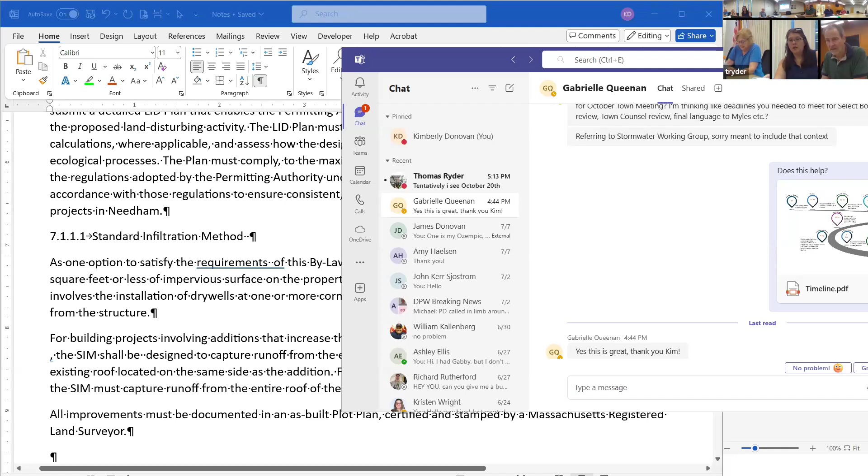It was almost an all-out brawl. Was that good? We're a very passionate bunch. Rage match. Yeah, we're a passionate bunch, that's for sure.

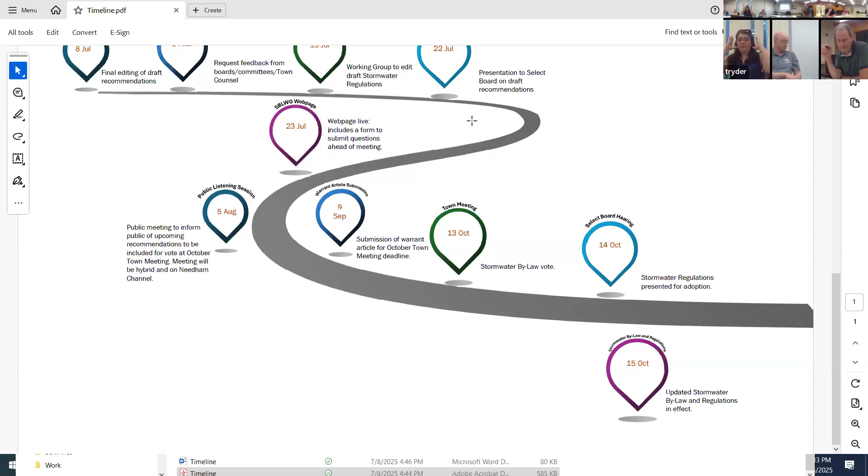Do you see a problem with putting it in our stormwater bylaw that if you put in an infiltration tank, you have to put in 2 trees? I don't understand. Want me to run it by him again? Yeah, go ahead. What I'm proposing is a simple, clear statement, because we had this meeting with the tree bylaw committee and some of the tree people and some of the large house people, and they're much further off than we are.

A lot of people want to see us deal with trees, although they're saying stay in your lane. So I thought a very clear statement that says, in the absence of any other bylaw or regulation, the applicant shall plant 2 or 3, whatever the number is, 2.5-inch caliper trees for every tank they put in. So we don't get into tree removal, we don't get into any of that - we just have that simple statement, and they can plant anywhere on the property.

You're talking about like Cultec, so your reasoning is - a Cultec or a dry well, there's whatever the options are, a system of infiltration units, you could have multiple locations. I don't have an issue with it, I think it's great.

Wow, good, nice, look at that Joe. It makes sense, bringing my mother's endorsement - my mother always used to tell me, anytime you get a good idea, take a nap. See you around.

All right, nodding off. Okay, so we're gonna come back to that when we get to that Chris section. Heath's gonna be surprised, he has to do one more review on it. I think he'll be thrilled.

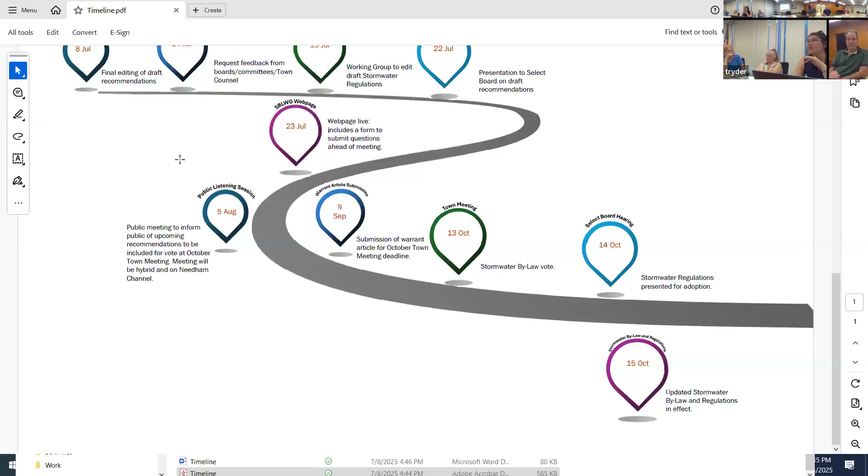I think that would kind of cover base for us. I feel it's kind of our responsibility to do something. Then once we have the tree bylaw, that takes precedence over that, so it's fine.

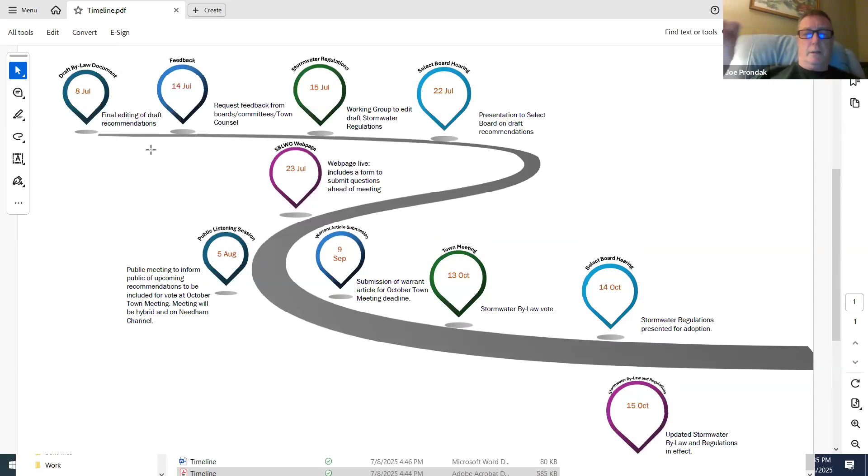Can I make one more comment before we move on? Katie King did bring up the point that she felt that - and you can correct me, Kim or Tom - Katie felt very strongly, and Lee was in agreement with her, that if the regulation is not ready for town meeting, the bylaw will have a much lesser chance of passing.

Hence the development of this little timeline or expansion of this timeline that I did before, putting it sort of where we are now. So it follows the little road here.

So the first one is today: draft bylaw document, final editing. We'll be done today.

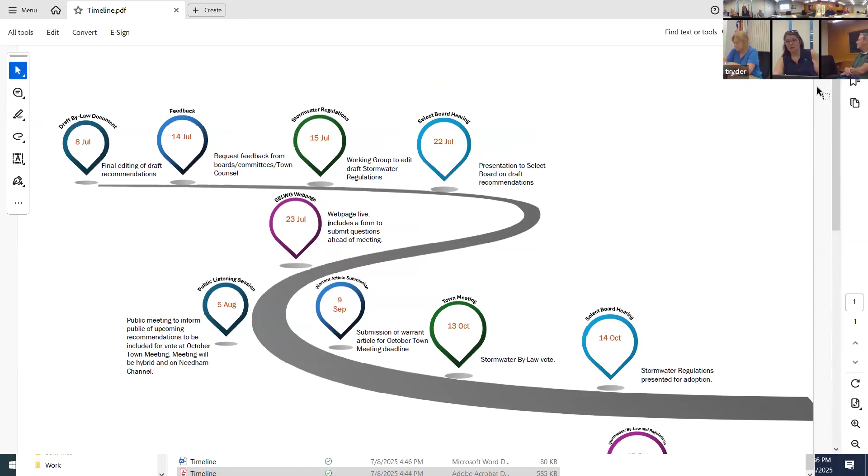All right, hold on, let me make it bigger. This is in the way. Are you having an eye test back there? So the regulations is just gonna be easy sneezy - it's not great, it's not gonna take us long. It's not gonna be easy sneezy, but we're gonna do it. We're gonna make it happen.

Positive thinking, Norman Vincent Peale, power of positive thinking, okay?

All right, so draft bylaw document, we're gonna finish it tonight. Then we're gonna make whatever Ed's finished thing, and by the 14th - I put the 14th just because that's next week, but I can do it as early as tomorrow if we're completely done - 14th of July, we send it out to the boards, committees, Town Counsel, whoever needs to review it. They get a week to do it.

I'm sorry, it's not that long, but they have till Friday. So the Conservation Commission doesn't need to review and discuss it at a meeting? I just need individual commissioners. They're not voting on it or anything like that, I just need them to review. We're basically asking them to look at it - is there anything in here that raises your hackles, that's what I'm asking.

I can send it out to the individual commissioners and they will give their feedback to me and then I will pass that on. Is that how that works? That sounds great, in between our two meetings. Just so you know, they can't discuss it.

Right, just any comments or thoughts that they have - if it's something they really like, something they really don't like, or think is glaringly inaccurate, something like that. That way you consolidate it so we don't have to deal with 15 different comments. And just so they understand too, what's coming down the pike - so if there's anything you guys need to do on your end as far as your regulations and bylaws, you are aware that it could be happening.

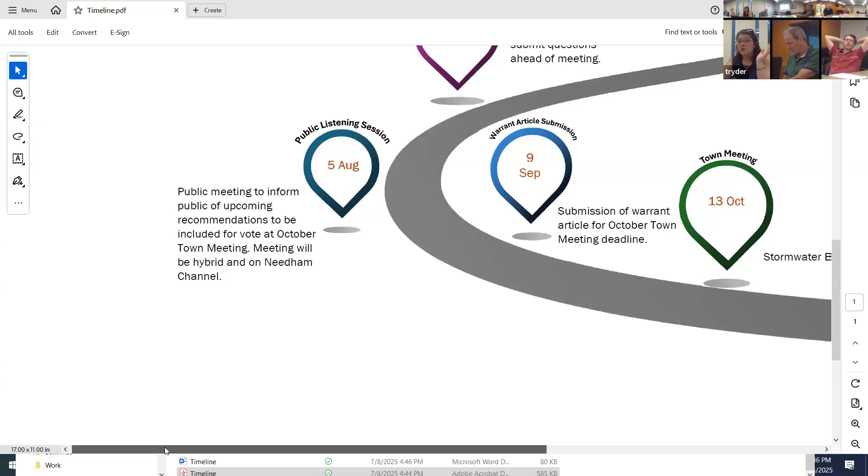And then the next select board meeting after that is... yes. We have a meeting on the 14th and we have a meeting on the 28th. So I'll change this to the 20th and the select board hearing to the 28th, because that's when we should be presenting.

Are you gonna send this out again for regulations acceptance? Yes. Okay, one other thing you should add is there's gonna be a presentation to the finance committee at some point.

So is it when we submit the warrant, or before we submit the warrant article? No, after — you have to submit it, then they will act, they'll question us. But you could just give a heads up, so somewhere between September 9th and October 20th. We have to have something in front of them to react to.

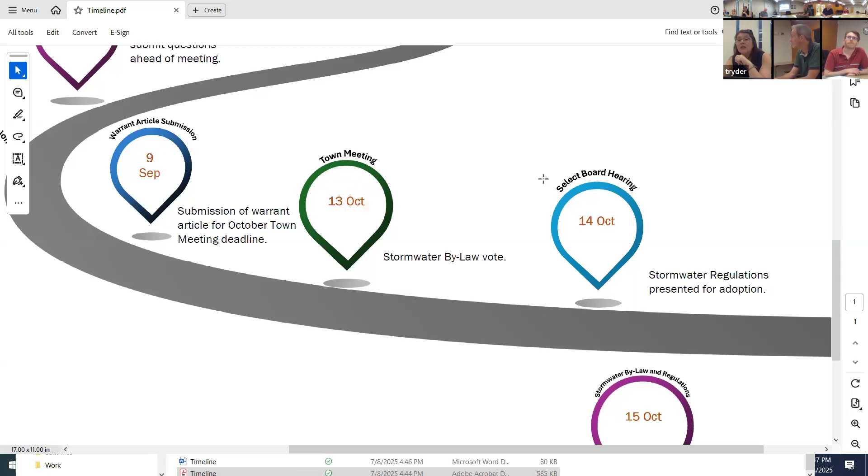Okay, I just want to make sure I'm clear as to where it happens. Okay, alright, so I will change the dates on town meeting to October 20th and select board hearing to October 28th. I'll wear my witch's hat for that. That one's for the regulations, to pass the regulations. Actually, I think it's the 29th — I think that might be a meeting that's being rescheduled. Just let me know.

If you guys could give me an email letting me know what date that is—whichever select board meeting hasn't been confirmed yet. I think whatever select board meeting follows the town meeting, that's the one we want to be at.

Josh, can you send me an email too? I have to put a bubble in for the finance committee somewhere between submission and town meeting. I don't know what that is, but I'll do that now.

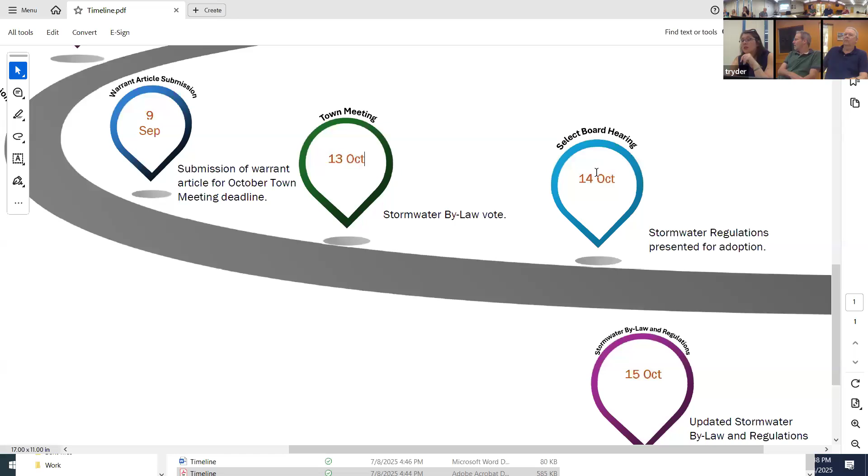Okay, and then the day after, the select board lovingly says go for it, when we hand our regulations over—updated stormwater bylaw and regulations are in full effect. So what action does the town meeting take on this? The town meeting votes yes or no on the bylaw. The select board votes yay or nay on the regulations. Right, so that's why it happens after the bylaw.

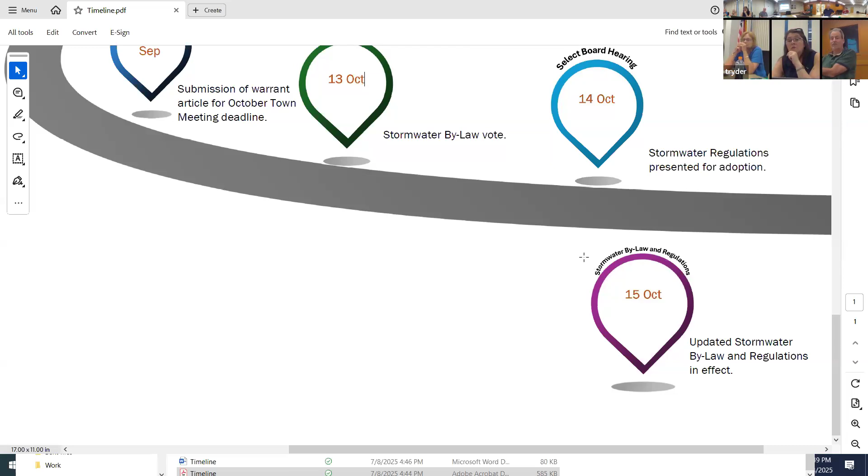Before town meeting, there might be a quick presentation to the select board as an article. On the 22nd of July we give them a thing. Somewhere between September and October, before they vote on it, they'll probably just want to touch base. Before they vote on the regulations—on the article, not the bylaw. The bylaw will be an article.

I'm assuming the July 22nd meeting you guys are going to be packed with stuff. Yeah, because it's the only meeting that month, so we'll probably do a broad brush stroke of the bylaw on the 22nd, and give more detail later. I'll give you another task on that email, Josh—if you guys could tell me where in there you'd want to put another meeting or presentation to the select board, where we fit that in. I think that depends on how controversial this is. We'll see how the July meeting goes.

Okay, August 5th, yeah, the August meeting. The September 24th meeting was switched to a Wednesday, and October 28th was also switched to Wednesday—the 20th. So if you could just let me know those dates.

Not to be negative, but I think flooding and stormwater is going to be in the forefront of people's minds. If you watch the evening news tonight—yeah, it's just unbelievable, worst ever, Texas, North Carolina, any of that. So if we're doing things to control flooding, that's gonna be well received. I think the one complaint might be, is this enough? What can we do?

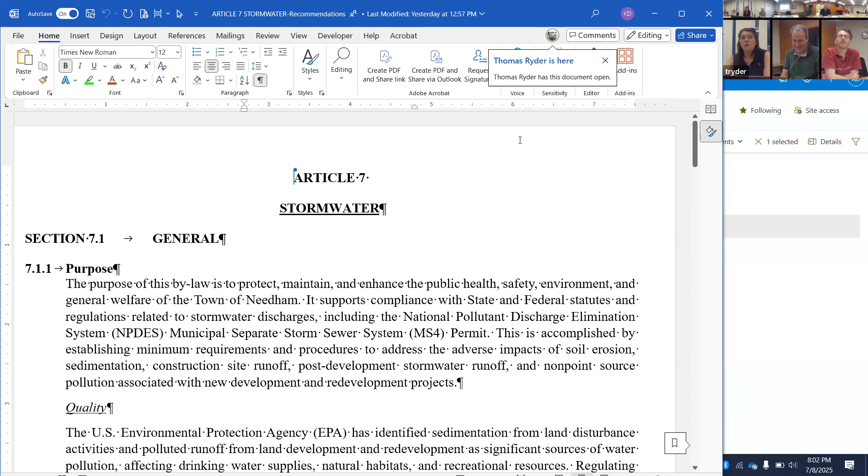Did you guys get the one I printed last week? I did not. I already handed it to you in the parking lot. Oh, thank you, Josh. Yes, can you resend it? I appreciate it. Made some further changes - just word changes, not formatting or whatever, just updated some stuff.

This is Stormwater, Article 7, Stormwater Recommendations. I thought we're done with Article 6. No, Article 7, Stormwater Recommendations, last updated yesterday at 12:57 PM.

We're gonna pick up where we left off last week so we can get through the last sections, then go back and review the definitions. What I did do is go through the document. I removed BMP, because nobody knows what a BMP is, and replaced it with SCM.

New terms, this is fast. John, guess what that is? The new term for BMP is now stormwater control measure. Oh, it's what the EPA uses, I think. Everything seems great, I like it as much, well better. Yeah, at least BMP explained it - best management practice is so ingrained in everybody's minds. Yeah, right, but unfortunately it doesn't really describe what it is, so it's hard to explain to somebody.

So I replaced it with SCM. I went through and made sure every reference to a spelled out or initialed reference had the spelled out version first, and then the initials only used following. So that's been done.

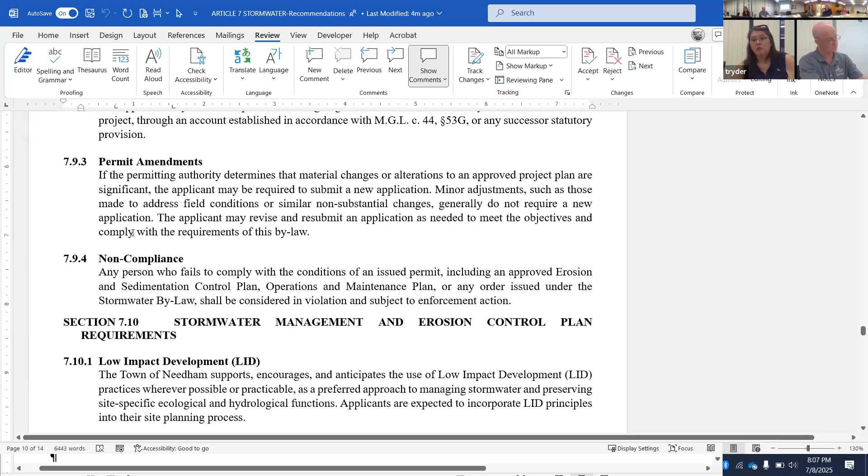That's it. We don't say anything about them having to use it, but we encourage them to use it. And that's in the definitions - well, it's an actual paragraph section. The low impact development language was a comment on our review required by NPDES for our bylaw review. It's one of the places where we fell short because we didn't specifically state that we encourage it, or that we want them to - it's please use them.

But is there a reference to what low impact development is, just as a term? Some readers might not really know. It's identified in what is considered low impact stormwater development - it's in the Massachusetts Stormwater Handbook. Low impact development is also, I think, something that should be in our regulations as to what would constitute low impact development. So this is basically the first two sentences of the longer thing we had before.

All right, so next is the regulated activities. Any construction or land disturbance activity regulated under this bylaw shall require the preparation and submission of a stormwater management and erosion control plan. The purpose of this plan is to ensure that adequate measures are in place to manage stormwater runoff, minimize erosion, and prevent sedimentation both during and after construction. The plan must demonstrate that the proposed activity will not result in adverse impacts to abutting properties, public infrastructure, or natural resources, and that it complies with the performance standards and design criteria outlined in the stormwater regulations. Obviously, we have to make those. So the permitting authority shall review all submitted plans for completeness and conformance with the requirements of the stormwater bylaw prior to approval.

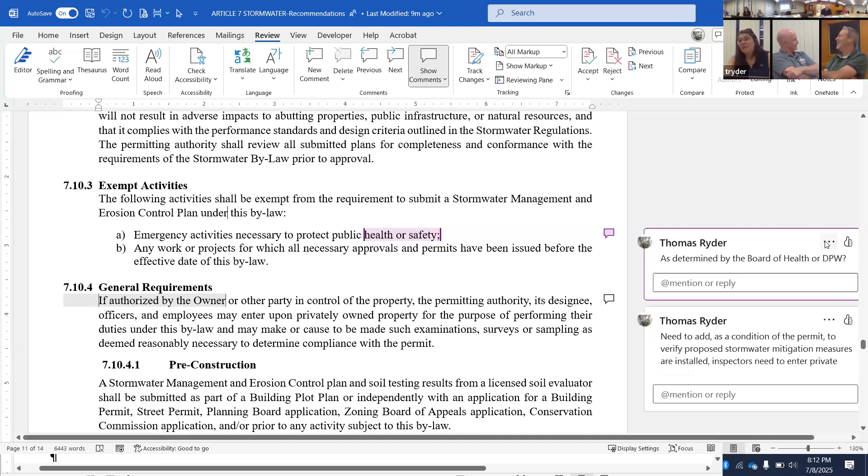So do we say, determined by the presiding authority? I don't know how you state who determines if it's protecting public health or safety. The building department could say it's about the safety of the building. As authorized by - Kristen is in charge of emergency management. So maybe, as determined by the authority having jurisdiction, commonly known as the AHJ. Oh, you guys and your initials, come on, you're killing me - I had to have one in there.

The reason I say that is because people say rain gardens are going to cause mosquitoes, and that's a health and safety issue. It is for me - I'm allergic to mosquitoes. Okay, so that one's resolved.

Next one: general requirements, and the topic here is stormwater management and erosion control plan requirements. General requirements - if authorized by the owner. Tom had put in a note about needing to add, as a condition of the permit, that inspectors need to enter private property to verify proposed stormwater mitigation measures are installed. So I'll read the whole paragraph, but I have a response to that.

If authorized by the owner or other party in control of the property, the permitting authority, its designees, officers, and employees may enter upon privately owned property for the purpose of performing their duties under this bylaw, and may make or cause to be made such examinations, surveys, or sampling as deemed reasonably necessary to determine compliance with the permit. I feel like we've already said it. So Tom, I really need you to tell me why you don't feel that's addressed, and this was one of the paragraphs Chris flagged about us having the right to enter property.

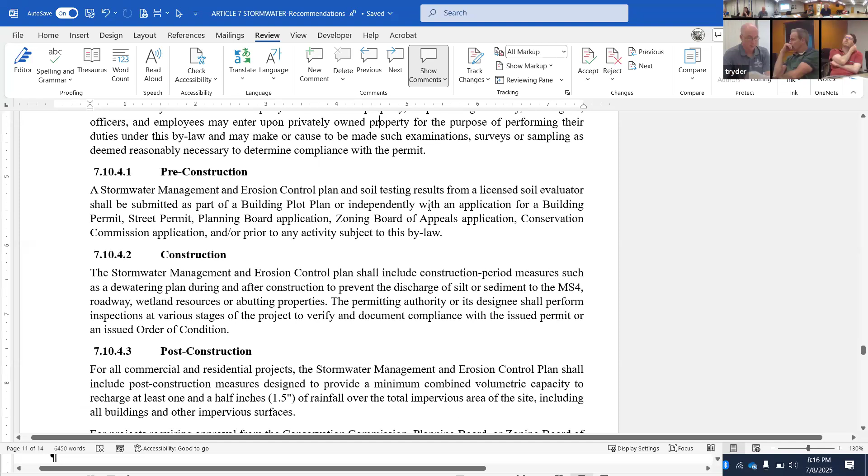There are licensed soil evaluators. Just for ease of reading, there are a lot of 'ands' in there. Stormwater management and erosion control is one thing, and then soil testing results are a separate thing. Between the two, rather than 'and,' can we just say 'along with'? Would that help with readability?

Stormwater management and erosion control plan, along with soil testing results from a licensed soil evaluator, shall be submitted. Does that help it? Sounds good. Comma, along with. So that's results.

Just a question, Tom. When we say a licensed soil evaluator, is that someone licensed by the Commonwealth, or an actual engineer? Yeah, that's licensed by the Commonwealth. Should that be in the definitions? Should we say a Massachusetts licensed soil evaluator? Is that a license issued in Massachusetts, or is it a civil engineer? It's a license, yeah.

But wouldn't we also accept something from like a geotech engineer, or even a civil engineer? I'm contemplating that. So, do you want to say 'qualified' instead of 'licensed'? Registered? Qualified might be better, because that encompasses the whole gamut. But I would put in a definition for 'qualified' then to say a licensed soil evaluator is qualified, a soil scientist may be qualified, an engineer would be qualified.

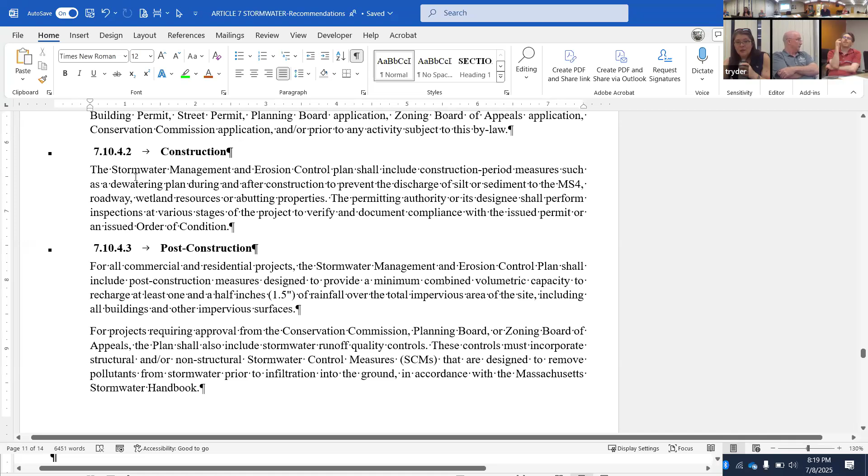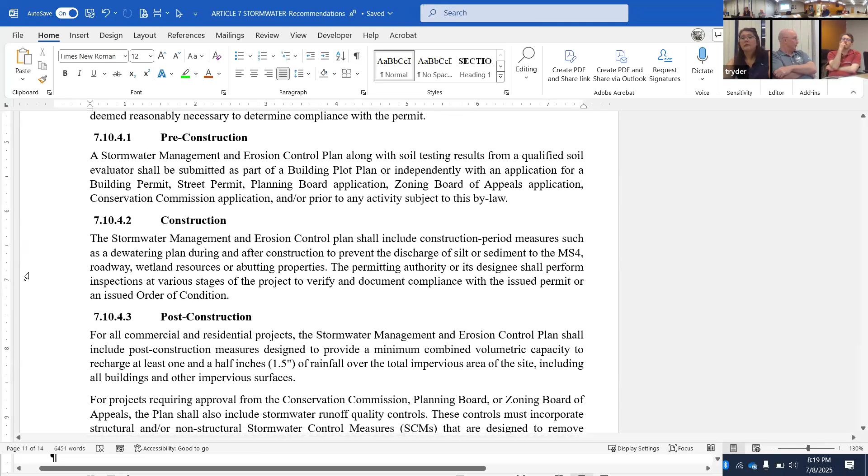This is why I need paragraph markers, I can't see it without them. The reason I have it as soil evaluators is because there's formatting of groundwater elevations and materials that are specific to the licensed individual who has to sign off on it, whereas a geotech will use a different format, may use a USDA standard, may use AASHTO, may use something else.

I'm gonna ask you guys to do this. Somebody's gonna volunteer to read out construction and post-construction and see if there's any comments or ideas or thoughts on the language, if we need to change it or if we're accepting of it. Are you losing your voice? Nope, I need to excuse myself. Read silently or read out loud? Why am I the only one who reads out loud?

Stormwater management and erosion control plan shall include construction period measures, such as a dewatering plan during and after construction to prevent the discharge of silt or sediments to the MS4, roadway, wetland resource, or abutting properties. The permitting authority or its designee shall perform inspections at various stages of the project to verify and document compliance with the issued permit or an issued order of conditions.

Is Deb there? The order of conditions is a permit. So do we need that, or any issued orders of condition?

Is Debbie there? She's there. Because it was a legal comment on that. Are you on mute?

Are you saying we could just stop at issued permit, Sue? Yes, because an order of condition is the permit. Right, Deb? Sorry, please repeat. On the last sentence, can we delete 'or any issued orders of condition' and stop at 'issued permit'? Because the order of condition is a permit. Correct? The order of conditions is a permit. Okay.

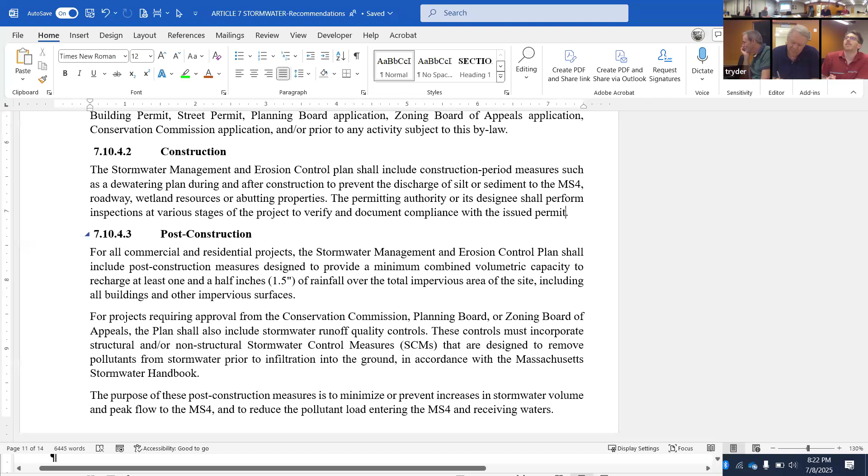For projects requiring approval from the Conservation Commission, Planning Board, or Zoning Board of Appeals, the plan shall also include stormwater runoff quality controls. These controls must incorporate structural and/or non-structural stormwater control measures that are designed to remove pollutants from stormwater prior to infiltration into the ground, in accordance with the Massachusetts Stormwater Handbook. The purpose of these post-construction measures is to minimize or prevent increases in stormwater volume and peak flow to the MS4 and to reduce the pollutant load entering the MS4 and receiving waters.

Well done. Next week on we're reading construction Shakespeare.

7.10.4.2, we took out orders of conditions. Yeah, we just clipped the end of the last sentence. And the issued permit, or order of condition, is a permit. Okay, and changes were made. Okay, post-construction, so thoughts? Do we love it?

You note on the definitions, remove order of conditions, because I know that is a definition. Okay, why didn't we have street permit on, for projects requiring approval from conservation, planning, zoning? Why don't we have DPW on that? Did we miss that, or did we remove it intentionally? Possibly. Right, no, we just assumed.

I have a building comment on that. You know, oftentimes people go to the zoning board for just approval for a certain use in a building. You know, so there's no construction going on. There's no increase in impervious surface. There's no repaving. There's nothing. So that shouldn't trigger automatic stormwater review.

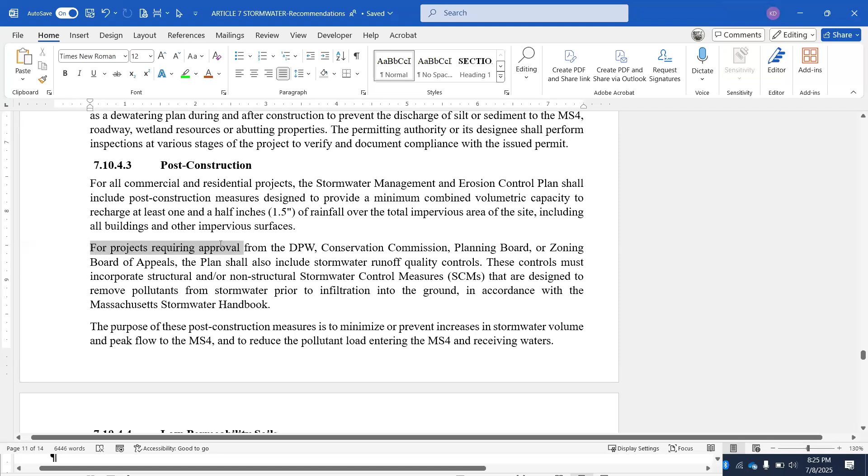Projects subject to this bylaw requiring approval from Conservation Commission, Planning, Zoning Board of Appeals. Okay, for projects subject to this bylaw and requiring approval on. Subject to this bylaw requiring approval. Okay.

I like it. Should 'plan' be capitalized here? I'm thinking no. Should what? Yes, no.

All right, low permeability soils. This is the part, I took out the part that says about determinations and stuff, because we decided that needs to go into the regulations. So this is just stating that in cases where low permeability soils are present, the DPW director may, in consultation with the engineering division, authorize modifications that are consistent with the intent of this bylaw. The applicant must conduct and submit soil testing results that describe soil types and groundwater elevations. And then we were gonna go into specifics in the regulation as to what types of alternatives might be available.

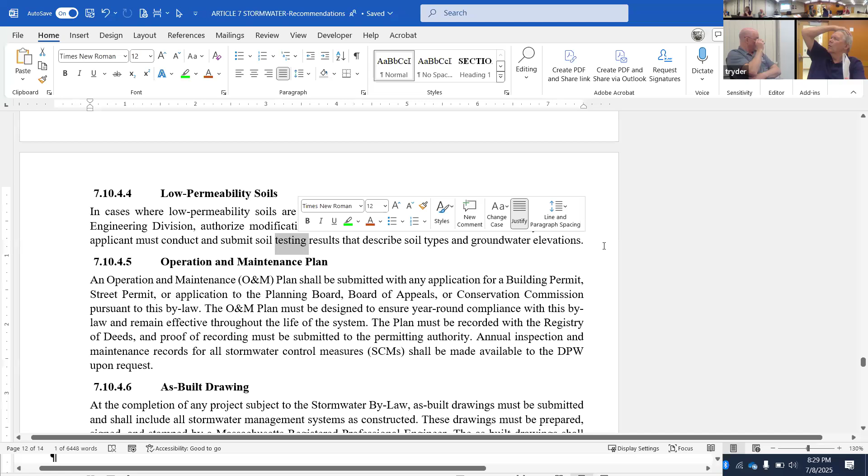So I think from what I'm hearing is basically a soil evaluator or someone who can be proved to be competent, because a soil scientist could be competent, or a geologist, someone, a soil engineer, yeah, anybody.

I just don't see the need for a perc test every time. No perc tests, that's what it sounds like to me. No, just a deep hole test to determine where the water is, the perc tests are useless.

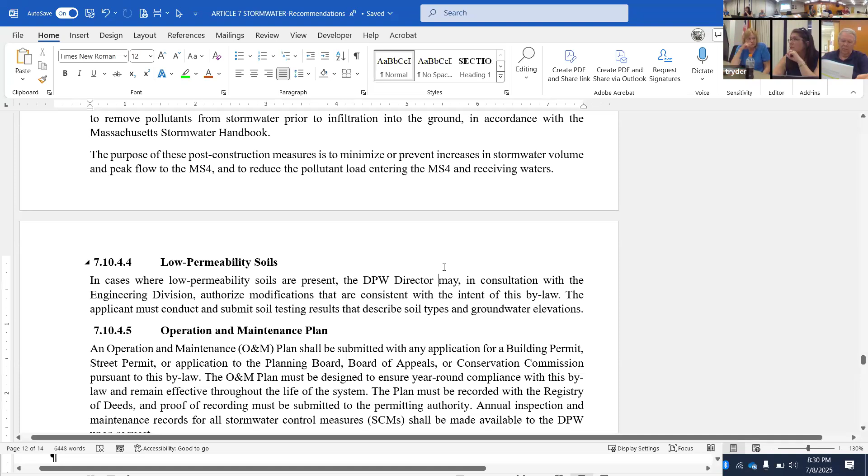So we should have in the regulations what is soil testing. Okay, no definitions in the regulations, correct? I don't know if we need to. I just think low permeability soils, if that should be a definition somewhere, but the regulations might cover it. I guess I would maybe make one suggestion, to add 'in consultation with the engineering division and permitting authority.'

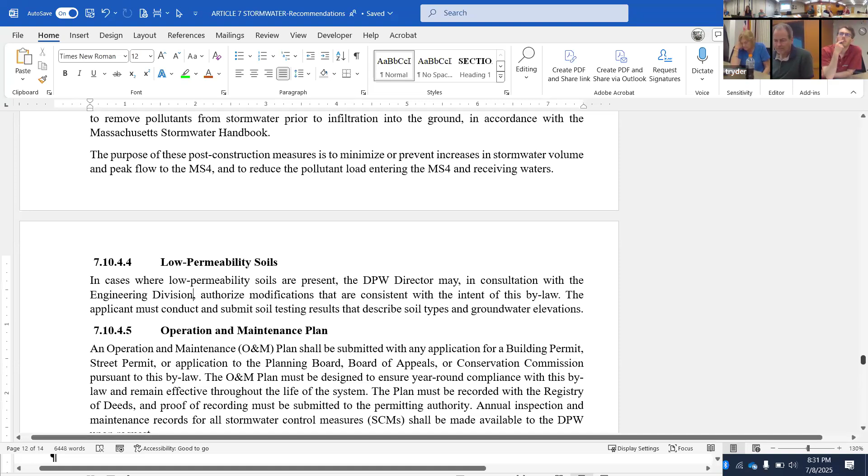Question: so the standard infiltration method paragraph, is that going into the regulations? Because it's a methodology, not... well, yeah, we're reviewing for the regulations. Yeah, it doesn't even get referenced anywhere in the bylaws, so take that out of the bylaw. That's what you're thinking too, right? Yeah, makes sense.

Okay, alright, operation and maintenance plans. An operation and maintenance, or O&M plan, shall be submitted with any application for a building permit, street permit, or application to the planning board, board of appeals, or conservation commission pursuant to this bylaw. The O&M plan must be designed to ensure year-round compliance with this bylaw and remain effective throughout the life of the system. The plan must be recorded with the registry of deeds, and proof of recording must be submitted to the permitting authority. Annual inspection and maintenance records for all stormwater control measures shall be made available to the DPW upon request.

And that was something we edited last time too, because we wanted to leave it open for when we do have the capacity to receive the O&M. Did we have it to the DPW or permitting authority?

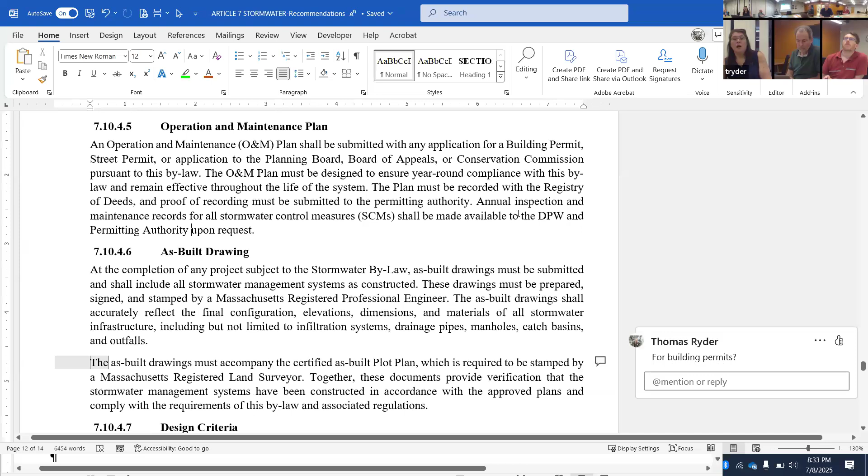As-built drawing: at the completion of any project subject to the stormwater bylaw, as-built drawings must be submitted and shall include all stormwater management systems as constructed. These drawings must be prepared, signed, and stamped by a Massachusetts registered professional engineer. The as-built drawing shall accurately reflect the final configuration, elevations, dimensions, and materials of all stormwater infrastructure, including but not limited to infiltration systems, drainage pipes, manholes, catch basins, and outfalls.

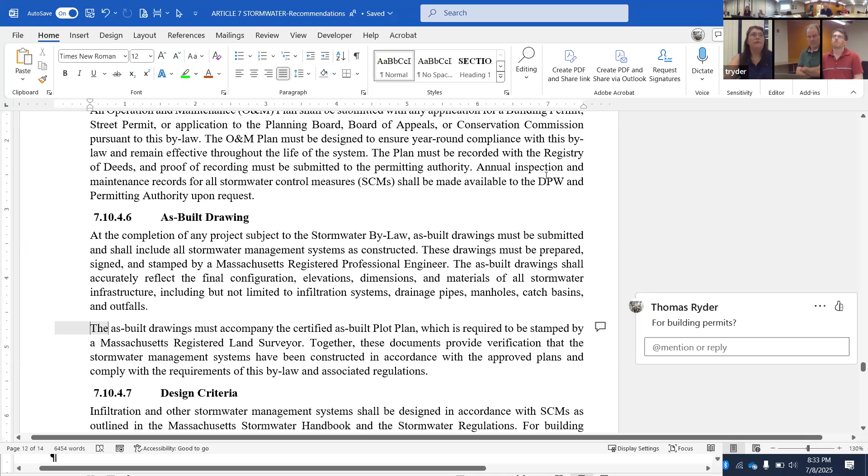I like that. Sounds pretty straightforward to me.

The as-built drawings must accompany the certified as-built plot plan, which is required to be stamped by a Massachusetts registered land surveyor. Together, these documents provide verification that the stormwater management systems have been constructed in accordance with the approved plans and comply with the requirements of this bylaw and associated regulation.

Tom had a comment on this, asking about building permits. When I was dealing with civil engineering stamps, typically it doesn't require submission to the building department - it's usually a surveyor, for the plot plans specifically.

So I'm suggesting that we have a civil engineer certify that it was installed in accordance with the plans. But usually a surveyor prepares the as-builts. It can be a civil engineer too, but under the building department, they don't. Joe, do you accept civil engineer stamps? It's gotta be - for offsets, you need a surveyor.

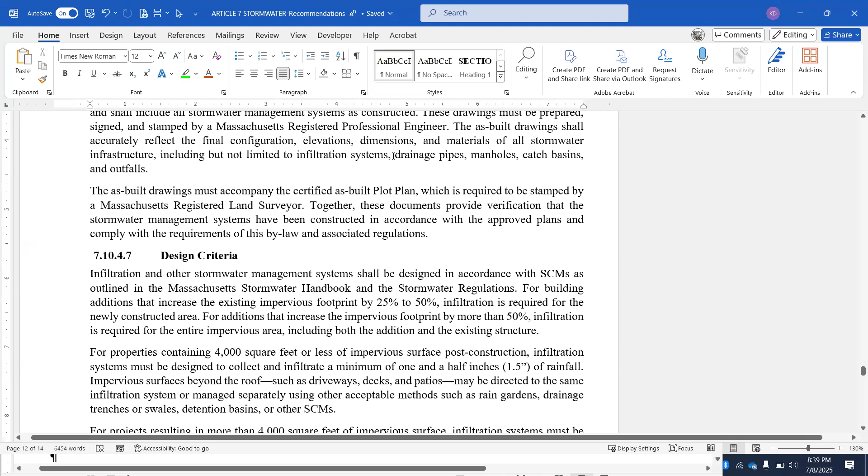That as-built is correct, that's how it was constructed. What was designed does get built. A surveyor is just certifying what's on the property, certifying the location of stuff, whether it be the house, the tanks, the pipes. And then the engineer would certify the design is correct. That sound right, Tom? Yeah, because this is the end of the line, so you'd better have the engineer sign it off.

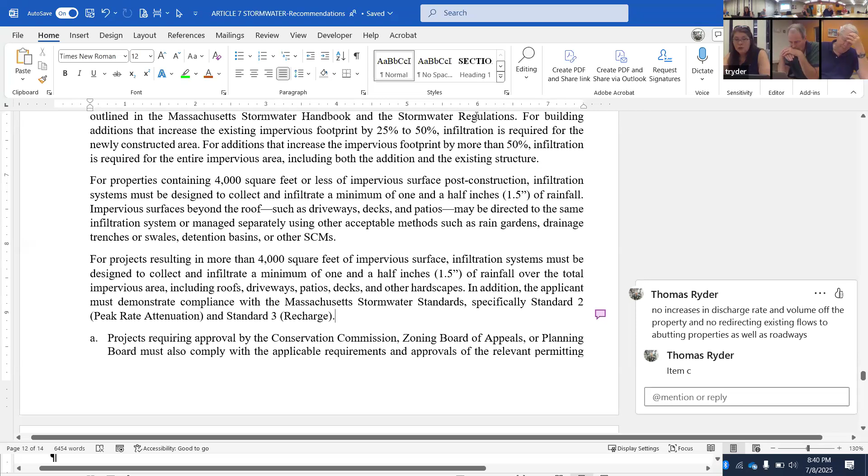For projects resulting in more than 4,000 square feet of impervious surface, infiltration systems must be designed to collect and infiltrate a minimum of 1.5 inches of rainfall over the total impervious area, including roofs, driveways, patios, decks, and other hardscapes. In addition, the applicant must demonstrate compliance with the Massachusetts stormwater standards, specifically Standard 2, peak rate attenuation, and Standard 3, recharge. Projects requiring approval by the Conservation Commission, zoning board of appeals, or planning board must also comply with the applicable requirements and approvals of the relevant permitting authority.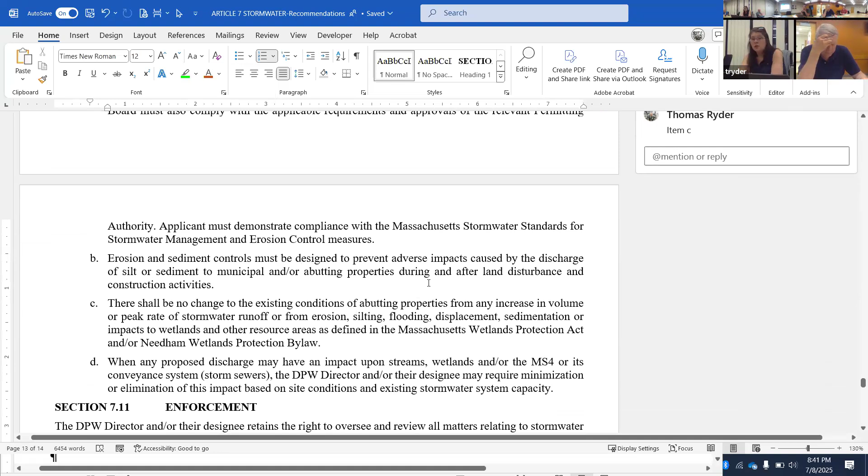Applicant must demonstrate compliance with the Massachusetts stormwater standards for stormwater management and erosion control measures. B: erosion and sediment controls must be designed to prevent adverse impacts caused by the discharge of silt or sediment to municipal and/or abutting properties during and after land disturbance and construction activities. C: there shall be no change to the existing conditions of abutting properties from any increase in volume or peak rate of stormwater runoff, or from erosion, silting, flooding, displacement, sedimentation, or impacts to wetlands and other resource areas.

As defined in the Massachusetts Wetlands Protection Act and/or Needham Wetlands Protection Bylaw. D: when any proposed discharge may have an impact upon streams, wetlands, and/or the MS4 or its conveyance system, storm sewers, the DPW director and/or their designee may require minimization or elimination of this impact based on site conditions and existing stormwater system capacity.

This is the category that we talked in detail with Chris on, and C was the one that we added because we wanted to make sure the abutters weren't being affected, which is what you noted here, so I think that's been addressed.

So what this means to me, if you scroll up a little bit, for projects resulting in 4,000... okay, right under that we have A, B, C, D. Is this the assumption that most of the conservation, zoning, planning will be seeing more than 4,000 square feet and therefore... I'm just trying to find out what this A, B, C, D is, you know.

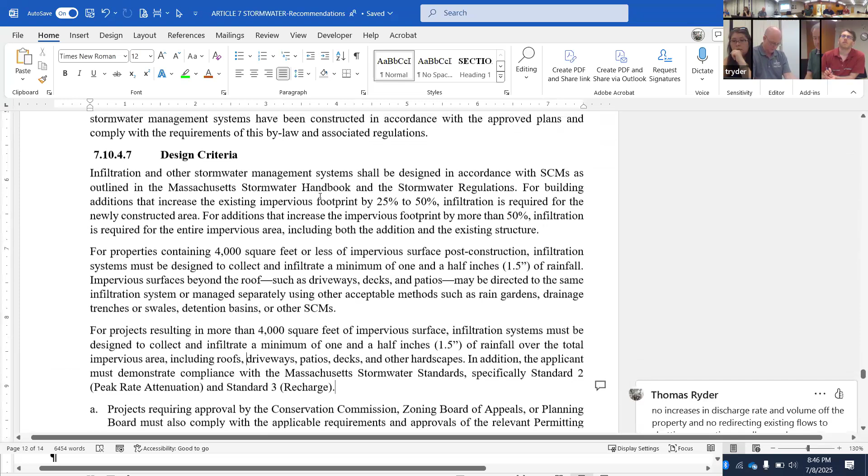Impervious is more, that's right. Yes, it is. And I changed it from impervious surface to impervious surface slash cover, because we used the two sort of interchangeably.

I have 3 comments. On the part where it talks about no runoff to the abutters, should we also say public land? We say no change to existing conditions of abutting properties, so whether it's public or private land we just say properties. Well, so do we mean streets? Yeah, like you can't dump it on the street and then flood down the hill.

I think we were playing with this over the last couple of weeks, so if we just clarify that, because I think that's what it was supposed to mean - abutters or public ways.

Okay, and then should we do the same thing we did in a previous section where we say projects subject to this bylaw needing approval from DPW, Conservation Commission, yada yada yada. And let's back up a little bit.

Yeah, oh yeah, is that in A? Yeah, in a project... project subject to this bylaw, right? Where was that, John? Where did we put that?

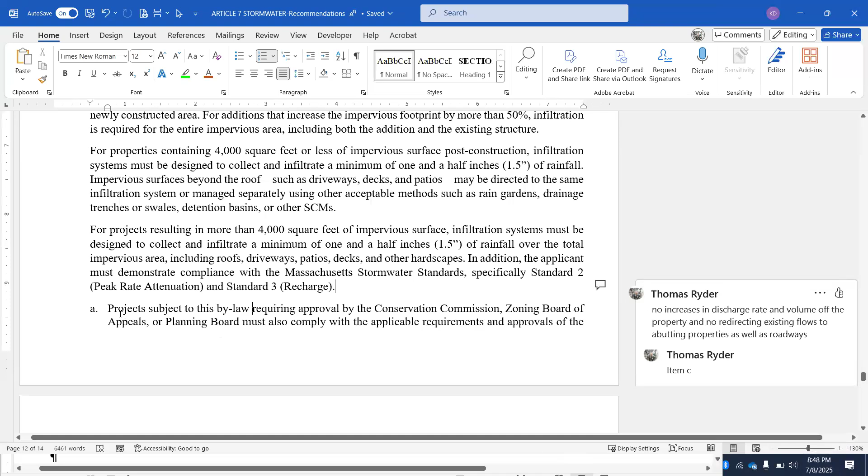And then my final comment is, if everybody liked my proposal at the beginning of the meeting, is this the place to put it in? And I've put it into an email that I can now send to Kim, and she could post that if we think this might be... Yes, all right, I agree. Good timing, right.

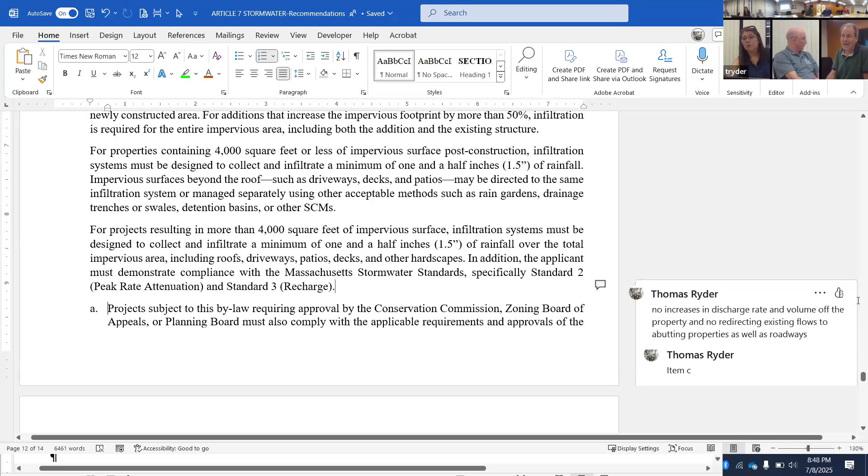So are we all agreed that I'm taking it out of A, B, C, and D, they're their own now? I just wondered why - is there a reason why we had A, B, C, D, E? Because I think that's how it was in the original bylaw. It's convenient for referring to, yeah, it's really helpful.

And then what was the project subject to this bylaw? Hold on. Change the format. Native trees.

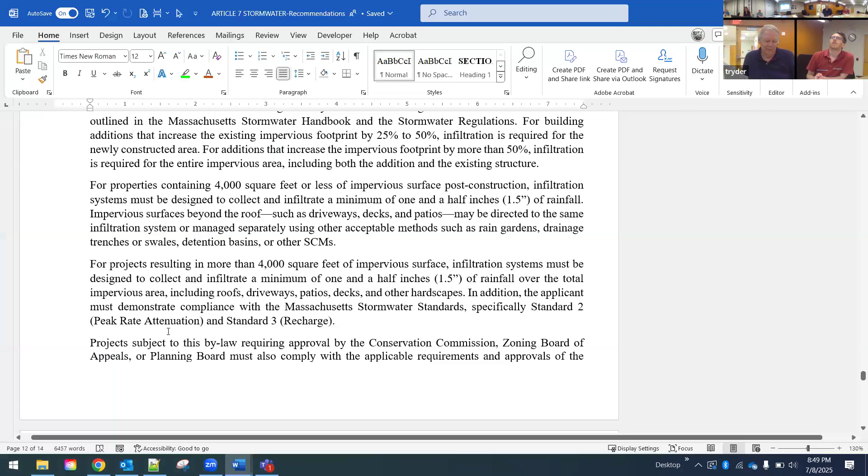Where do you want to put it? Back on at the end of it. So I have some summer seasonal help right now going through the last several years of our permits.

And trying to get an overview of how it's been working. I think one of the things they're finding out is that some of the surveyors have been pretty creative on impervious area. So there could be a trigger for like, is there really more than 4,000 square feet of impervious area already for many of the sites?

The definition really matters. Yeah, and also I guess the design really matters, because the surveyor is not designing, they're just saying oh, you know, here you go, so it's interesting - certificate, right?

I think that Joe should go after, before what was previously the ABC, so right after the other paragraph. Yeah, I don't disagree, that's where I initially was gonna put it.

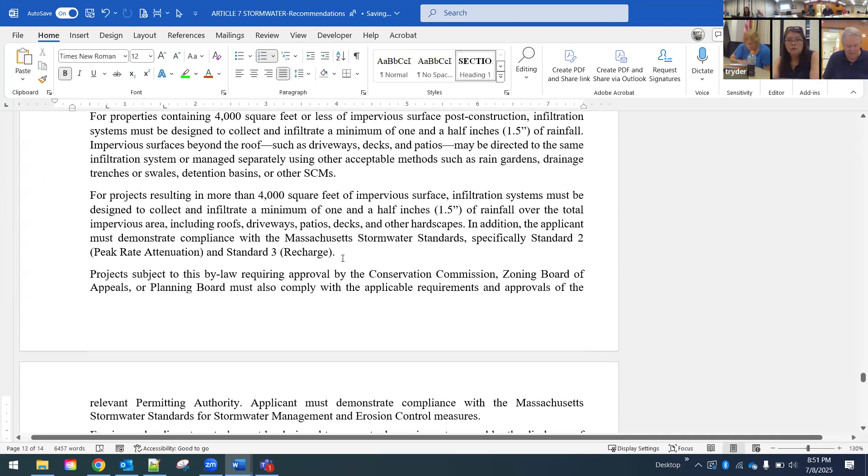For each required holding tank, Cultec, designed dry well, or rain garden shown in the proposed plan, we're gonna add a tree. For a rain garden too? Yeah. I would exempt the rain gardens, because you're already trying to populate more vegetation anyways.

Well, Cultec's a brand name, so. Do you want to just define holding tank? Yeah, call it dry well system. Maybe. You wouldn't say infiltration system? Or designed dry well system.

Yeah, we're not doing tanks, we're doing— right. Joe, you want it simple. When he's saying in-ground tanks, he's talking about infiltration chambers. Chambers, okay. So, infiltration systems as defined by the regulations.

Maybe we're splitting hairs here—chambers, we're talking holding cisterns, chambers. Chamber system, yeah. For each required infiltration chamber system or designed dry well shown in the proposed plan. So this is just a counting issue—does one project have a single system, or sometimes four, typically one or two. Is each tank a system, is that what you're saying?

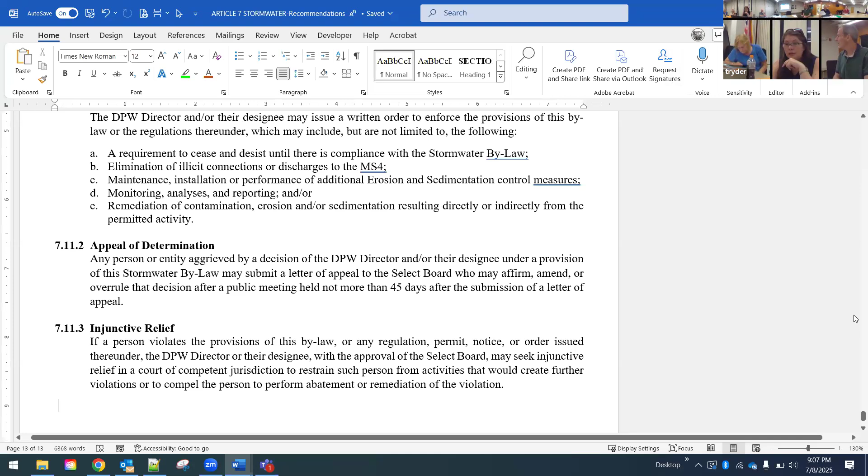Definitions. Sorry, I just moved my thing again. Well, it's been a long time since we looked at those.

Before I go back to definitions, in the first section here, under quality, we said consider the preservation of trees and tree canopy. Can we get rid of that statement since we added the tree section in the requirement? Well, that's part of the objectives, right? So keep it, then we can point to our clause - that justifies what we said in that last section.

Instead of 'consider preservation,' how about 'preserve' the tree? Or 'support the preservation'? Promote the preservation.

Actually, it's not just canopy - it's also because we want erosion control, right? So it's not just because we like greenery, it's because... A tree doesn't really suck up a whole lot, I mean it will if you remove all kinds of stuff, but it's not like if you plant a tree you're now getting rid of...

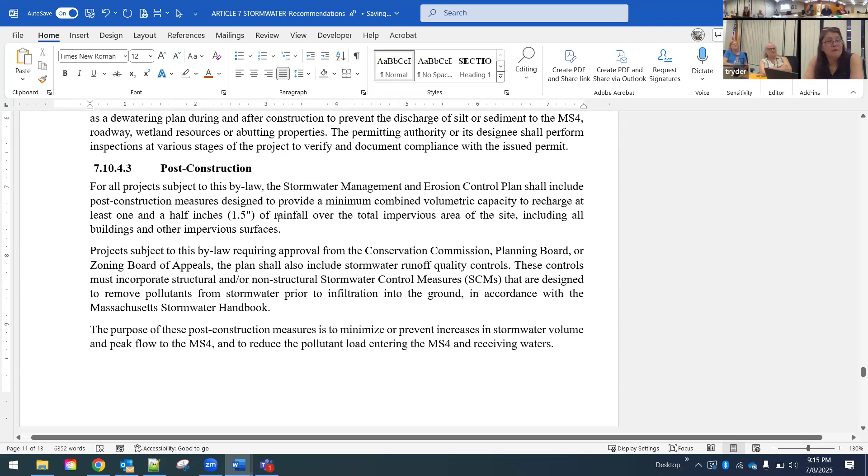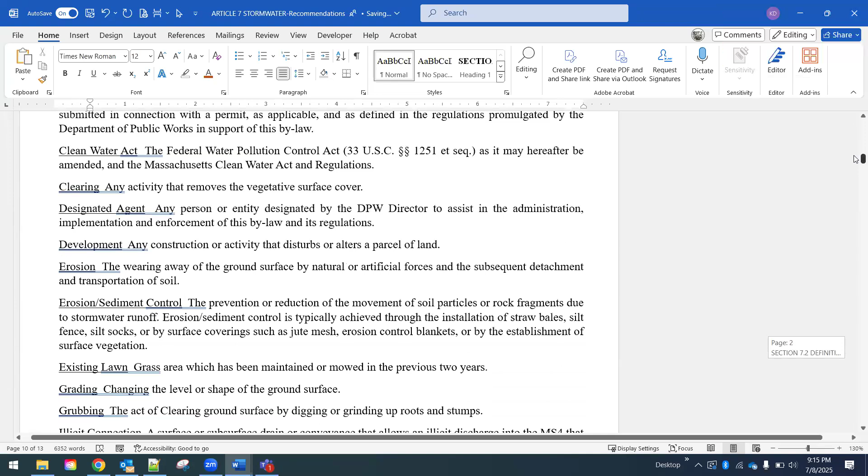I wanna know how Joe ever figured out 750 cubic feet. Oh, how many minivans? 42, yeah, minivans. Joe, how'd you figure that out? I'd say it's because you don't have a life. Just kidding. What did I figure out? How many minivans? Sometimes it's hard to hear here when you're on. Minivans, how many minivans were 42, 750 cubic feet? I wanted something relatable, so I kind of did a measurement thing on a minivan. That's genius, very good. Not a CR-V or Sienna? Yeah, I know, yeah, thinking about how many cubic yards one minivan takes up.

Okay, so we got rid of commercial. Clearing: any activity that removes the vegetative surface cover.

Designated agent: any person or entity designated by the DPW director to assist in the administration, implementation, and enforcement of this bylaw and its regulations. It could be any of those, not all of those. Yeah, right, correct.

Development means any construction or activity that disturbs or alters a parcel of land. Sure.

Erosion means the wearing away of ground surface by natural or artificial forces and the subsequent detachment and transportation of soil. Thank you, Google.

Erosion or sediment control: the prevention or reduction of the movement of soil particles or rock fragments due to stormwater runoff. Erosion or sediment control is typically achieved through the installation of straw bales, silt fence, silt socks, or by surface coverings such as jute mesh erosion control blankets, or by the establishment of surface vegetation. I could take off the second sentence if we just want to leave it as soil particles due to stormwater runoff, but I think it's helpful.

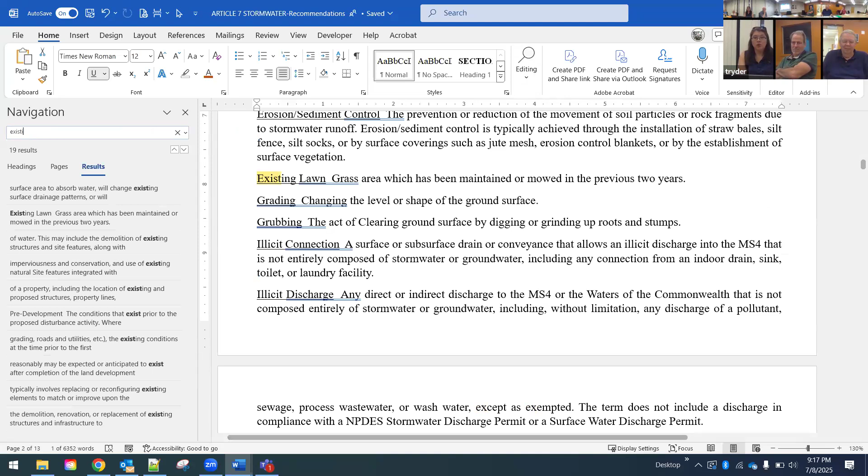Existing lawn, this was one of those things that was questionable, but we had it defined in our original: existing lawn, grass area which has been maintained or mowed in the previous 2 years. Why do we need that? I have no idea. Is there something, do people do projects in phases? I think it's because when we did the removal, if I'm not mistaken, when you regrade your property or whatever to do your lawn. Well also, if a property is for sale for a long time and no one's mowing it, then the native vegetation will pop up and then people will argue it's not the maintained lawn.

Oh, so it's under the no-approval-required section for these things, one of them being restoration of existing lawn areas without lot grading. Okay, I'm good. I'll put my teeth back in my head in a minute. I lose my words all the time.

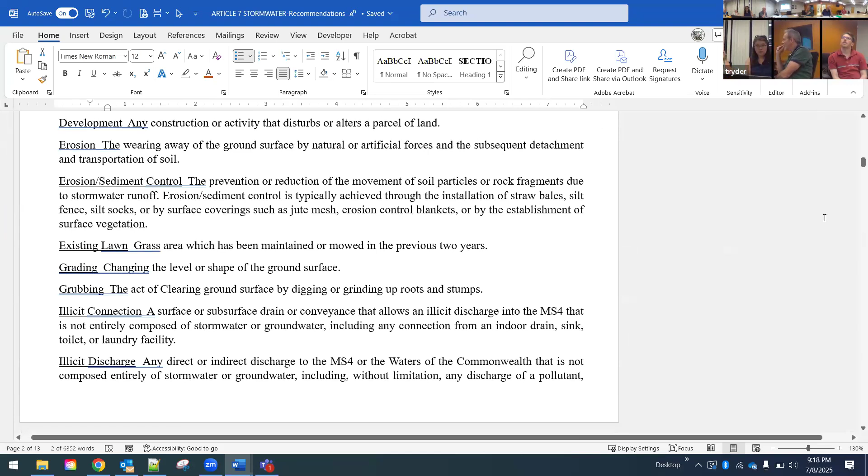Okay, grading means changing the level or shape of the ground surface. Grubbing is the act of clearing. We're going to insert something here, after grubbing, so holding tank. I'm just going alphabetical on my list.

Holding tank? Where does that show up? We just added that. Didn't we change it to something else? Yeah, we changed holding to infiltration system.

Nice try. Ah, no, just kidding. Okay.

Illicit connection: a surface or subsurface drain or conveyance that allows an illicit discharge into the MS4 that is not entirely composed of stormwater or groundwater, including any connection from an indoor drain, sink, toilet, or laundry facility. Including, but not limited to, any connection, because it could be something else.

So a sump pump doesn't count because... well, here's the thing. Originally we had in there 'not entirely composed of stormwater or clean groundwater.' However, legal question: what is clean groundwater?

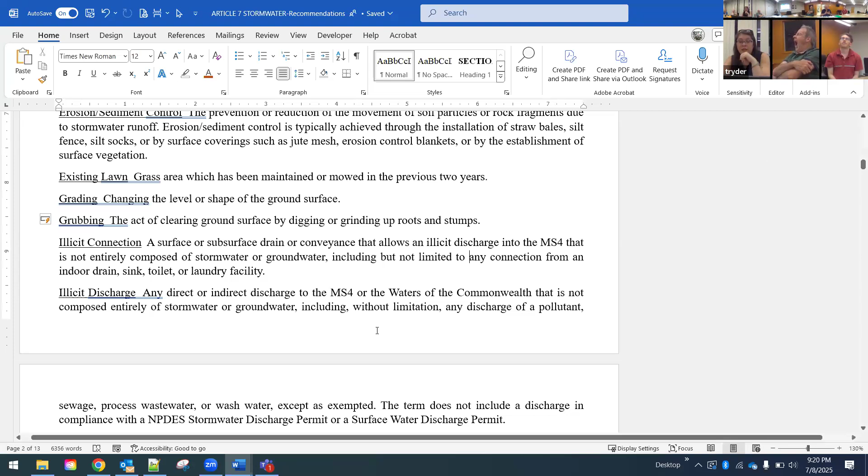So I took out 'clean.' If they flag it again, maybe we'll deal with it. I don't know, is there any reason why 'clearing' has to be capitalized? It doesn't, so I changed it.

Illicit discharge: any direct or indirect discharge to the MS4 or the waters of the Commonwealth that is not composed entirely of stormwater or groundwater, including without limitation any discharge of a pollutant, sewage, process wastewater, or wash water, except as exempted. The term does not include a discharge in compliance with an NPDES stormwater discharge permit or a surface water discharge permit. In other words, if they have a reason to do it and they've been approved, right?

That doesn't cover it. So here I changed it to impervious surface/cover instead of just impervious cover or impervious surface. An impervious surface is an area within a parcel which prevents or significantly impedes the infiltration of stormwater into the soil.

Common impervious areas include, but are not limited to, buildings, driveways (including paving, concrete, stone, gravel, and dirt), parking lots, paved walkways, pools, patios, tennis and basketball courts, and other similar non-porous areas.

Do you want to say impervious means something that's permanent? Like an ice skating rink, a temporary one? What if we just say sports courts? Yes, sports courts, like pickleball.

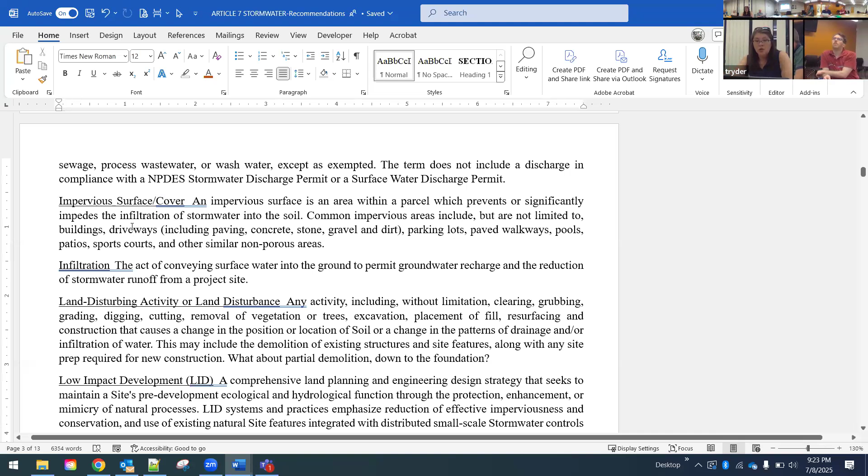Infiltration is defined as the act of conveying surface water into the ground to permit groundwater recharge and the reduction of stormwater runoff from a project site. Land disturbing activity... you want to see a project site?

Land disturbing activity or land disturbance: any activity including without limitation, clearing, grubbing, grading, digging, cutting, removal of vegetation or trees, excavation, placement of fill, resurfacing and construction that causes a change in the position or location of soil, or a change in the pattern of drainage and infiltration of water. This may include the demolition of existing structures and site features along with any site prep required for new construction.

What about partial demolition down to the foundation? I would say you're not changing the impervious surface, so there's no requirement for infiltration if it's going down to the foundation. That would be my opinion, since you're not changing the amount of impervious surface.

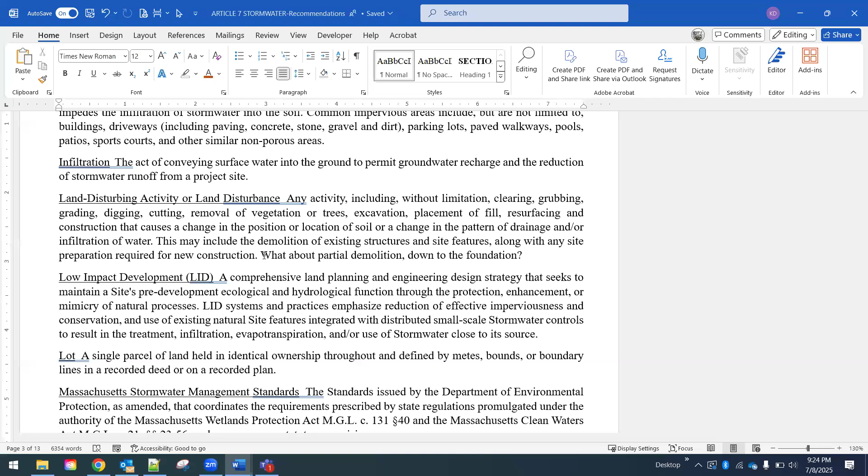Well, it depends how much square footage. If it's over 4,000 square feet, then you would still have to. This is where we differ, because this is 40 Lake Drive. Conservation was requiring that they infiltrate, and they said we ran it by the building department, we're only going down to the foundation, so we don't have to infiltrate. It went back and forth.

Over who had jurisdiction over it. Their argument was that the issuing authority before had the final say. And we said no, we have the final say under our bylaw. So you deemed it a land disturbance that required infiltration, that going down to the foundation was essentially rebuilding the house. We deemed it as being new construction.

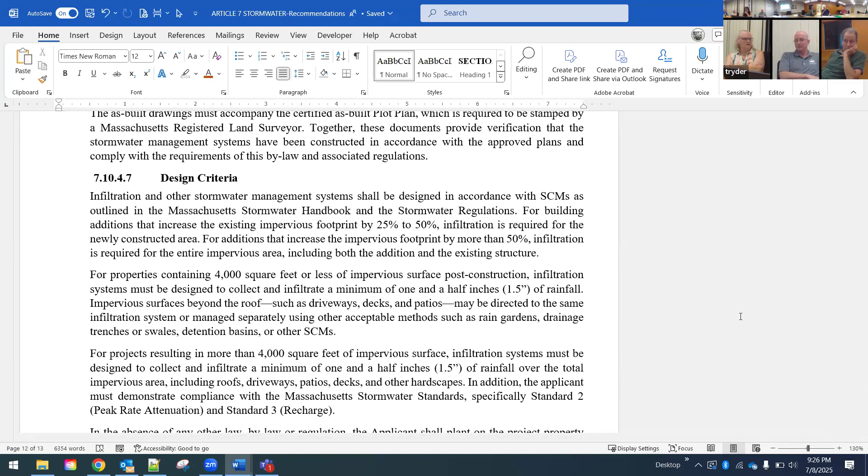Were they regrading the property too, or just doing a structure? Well, they ended up doing a lot of things they weren't supposed to do. They came to conservation and said we're just bringing this down to the foundation, and that wasn't it - it was like, whoops, we scooped out a few buckets of ground, no disturbance, okay, and then suddenly there was.

So wouldn't they fall into this though, under the design criteria for properties containing 4,000 square feet or less of impervious surface post-construction?

They need to have 1.5 inches of rainfall. They wrote a note on the plan that said even though the authority said they weren't required to infiltrate, that they were doing it to be nice. Infiltration systems must be designed to collect and infiltrate a minimum of 1.5 inches of rainfall - that was their interpretation. Impervious surfaces beyond the building can go somewhere else.

Okay, so even in the case of bringing it down to the foundation, it technically wouldn't trigger the bylaw - especially the old way we had it - based on a building addition increasing the footprint by 25 to 50% or more, because it's not changing the footprint at all.

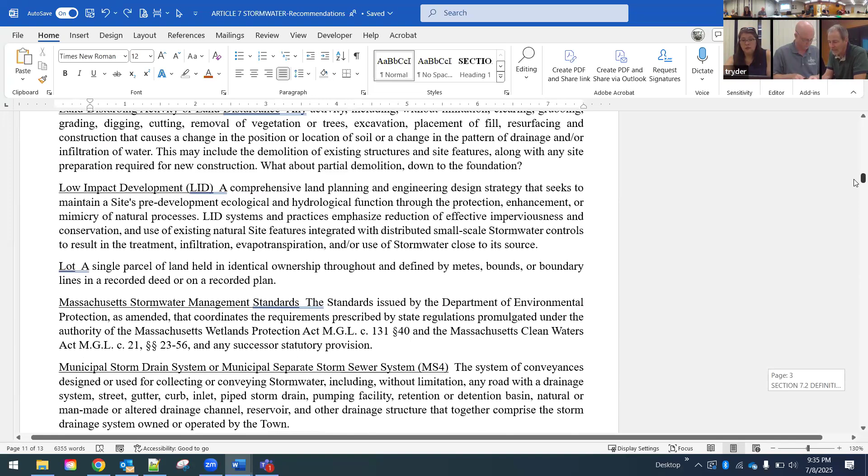This was always an issue from the beginning with going down to the footprint. So in definitions, are we defining new construction as land disturbing activity? It says construction or replacement of a structure, house or building which requires a building permit, or construction, reconstruction of a parking lot, or construction of a subdivision roadway requiring planning board or board of appeals approval.

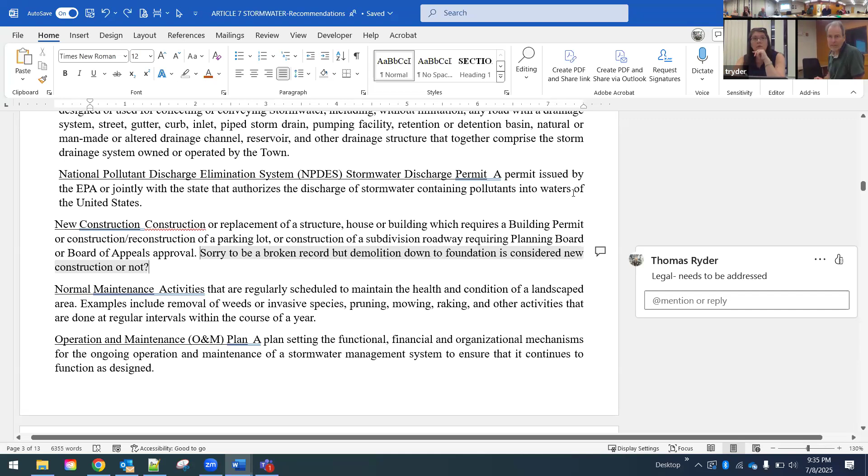And again, how about the 50% of a shell? That's what Joe Riley said, right? Isn't this the same ZBA definition? So are you happy with this definition? Isn't this the same as what conservation has? That actually solves their problem. If you go by the building one, if 50% of the shell is removed, altered, or whatever, then it's new construction. So the fact that it was just foundation, the issue is moot.

What definition were we on when we started this whole thing? We were on land disturbing activity or land disturbance. There's a question, what about partial demolition, down to the foundation? Okay, so let's take that out and clarify it in the new construction one. Yes, land disturbing activities is what it is. So get that out and then quickly go down to new construction, and say new construction, replacement of...

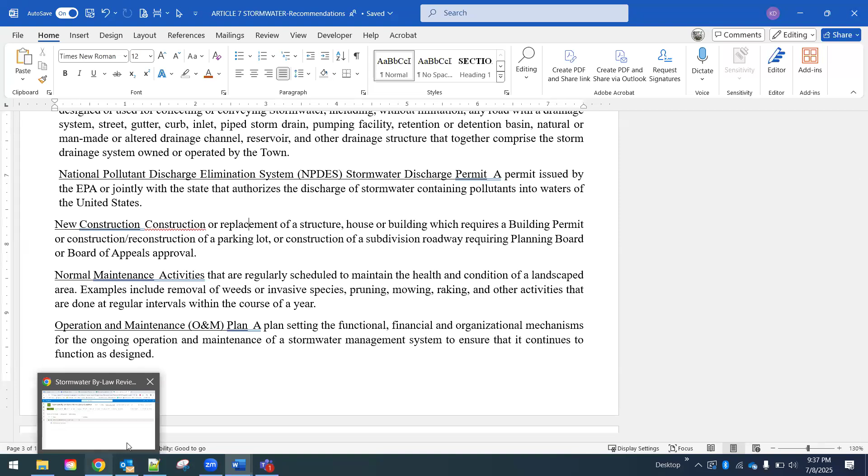And Joe, what was it, 25, 50% of the shell? Yep. We could just say, as defined, new construction as defined by the zoning bylaw, or the conservation regulations. I think there may be a difference. All right, we put both, we can say both depending on. If you're going from the Concom, then you're using your definitions. If it's not a Concom project, you're using building.

So we can give a nod to each of them, so it works for each of them. And then say, yeah. Okay, and do you want to say in parentheses building permit, building bylaw, or... No, just zoning bylaw, zoning, okay.

Little top one. I know I can see the whole thing somewhere. We were zooming right along until we get to that one. Yeah, that's been an underlying issue all along too. So now we're clear, no more conflict. Wait, we didn't see a definition. Where's the definition?

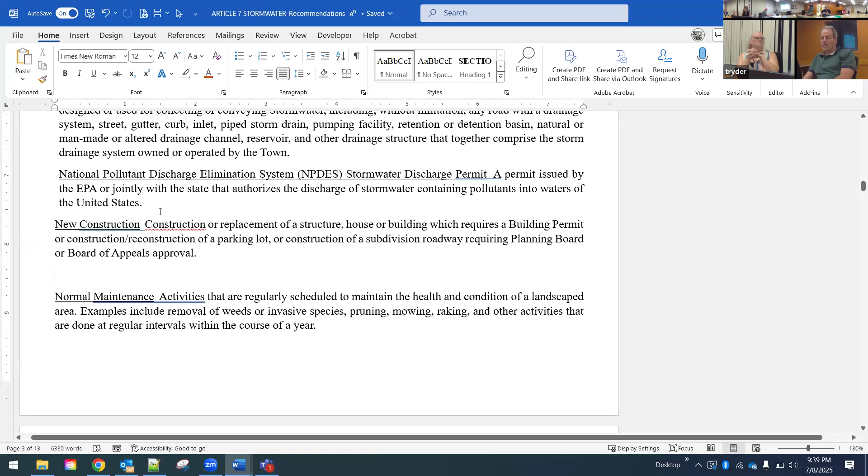Well, we're leaving either the conservation regulations or the ZBA bylaw. Not zoning, yeah, put them both in there. Or just put a reference to both. Yeah, we just have to do a reference, we don't have to put the whole thing in. Because the zoning bylaw could change and the conservation rule or regulation could change. So I wouldn't put the specific language in, I would just refer to the zoning bylaw or the conservation commission rule.

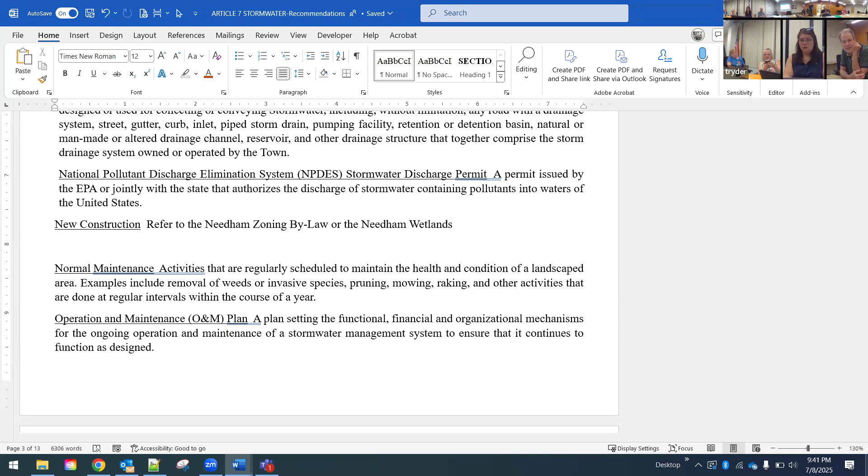What if the project's in our jurisdiction and has to go before the zoning board? We could put you in a boxing ring. What are your regulations called again? Wetlands protection regulation. But that'd be a property within your jurisdiction, so, yeah. In the case where it was in front of both boards, I think it would be whichever one was more restrictive would apply.

Right, I can't remember what it's called. Needham wetlands protection act? Wetlands protection act, gotcha, yeah. No, wetlands protection regulations is what we have it under. Where the hell did I just go? New construction, there we go. Wetlands protection regulation, as applicable. How about that? Yay.

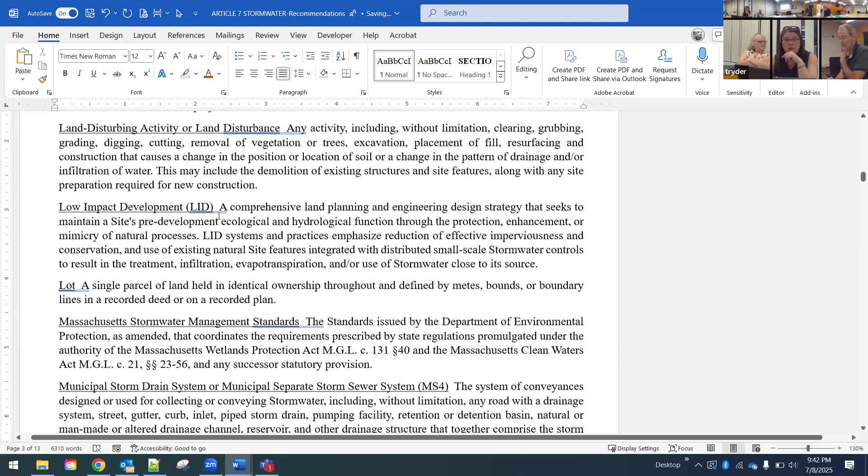Okay, back up to, we defined, next week, oops, no, low impact development. Low impact development is here. I'm just checking, addressing the word evapotranspiration. Yep, it was not my definition, let me tell you. That is definitely off an EPA definition, I gotta tell you.

We defined what a lot is: a single parcel of land held in identical ownership throughout and defined by metes and bounds.

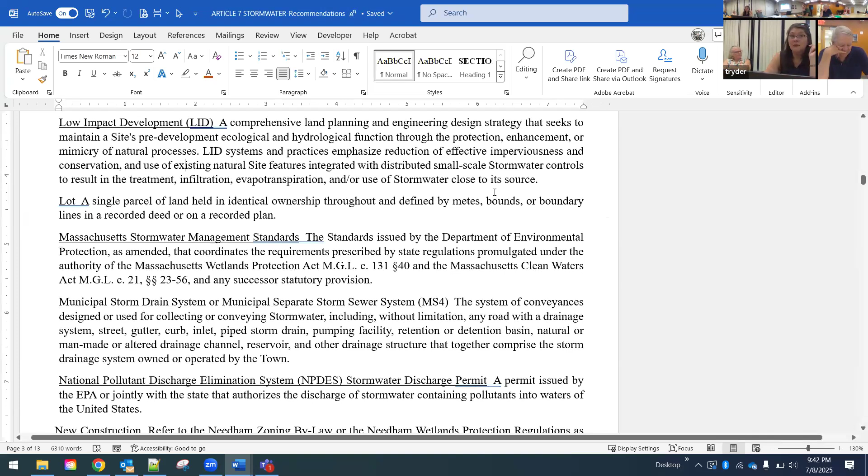Or boundary lines in a recorded deed or on a recorded plan. Massachusetts Stormwater Management Standards, the standards issued by the Department of Environmental Protection. Again, this definition came off of EPA. Municipal storm drain system, or municipal separate storm sewer system, otherwise known as the MS4.

Sorry, we passed by the low permeable surfaces. Oh, sorry, soils - low permeable soils, okay.

How would we like to define that? Low permeable soils with low permeability... with evapotranspiration. Sounds good to me.

What's the content? Isn't it challenge soils? No, we're not trying to. Do we call them poor soils or completely... I think it's technical soil type, like silt loam, clay. Don't bring him into this - he's gone. You are still stewing over that? No, we're good.

Low permeability soil is soil that has a limited ability to transmit water or other fluids through its structure. Perfect, leave it to AI. AI to the rescue. Consists of clay - it's soil where water struggles to drain or infiltrate.

Soil permeability refers to how easily water or other liquids can flow through a soil. It's a key factor in how well clay, silt, or hard soil drains, and so on. Such as hard pan, silt, clay.

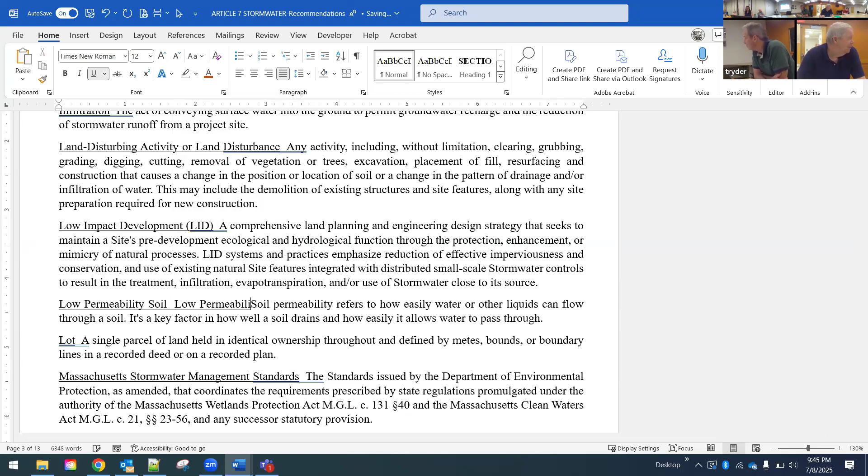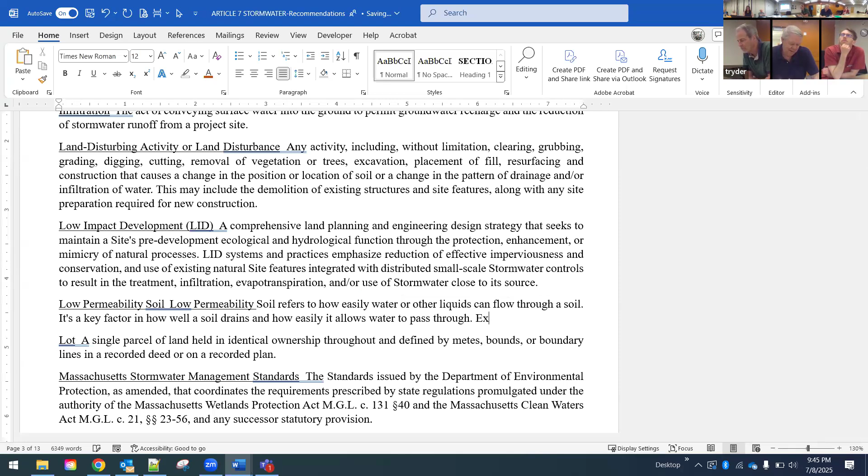So hold on, let's take that one. Good work, all right, all right. I'm like, got to nip these. I'm gonna waive it on the list. We didn't do it.

Clay, what else? Silts, ledge - primarily composed of clay, silt, ledge, or hard pan. Hard pan, one word, right? Examples include but are not limited to clay, silt, ledge, or hard pan. Primarily consist of clay - is that enough? Okay, the underlining - yeah, that's it.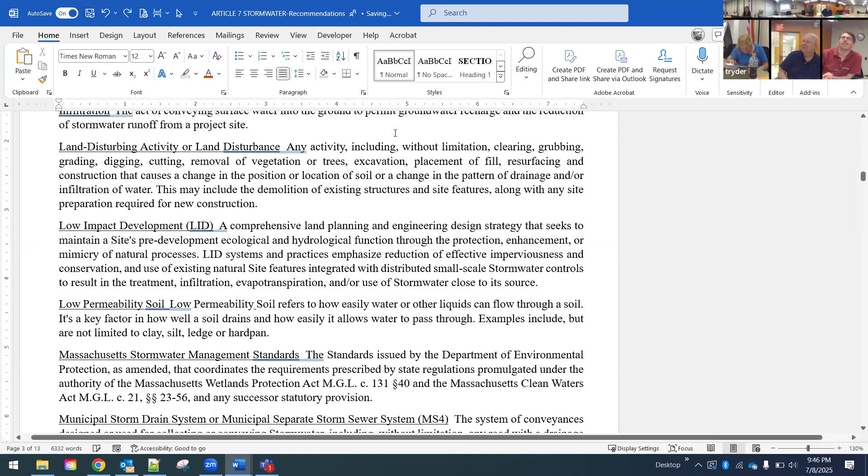And lots, just to alphabetize it - lots should go before low impact development. You're a stickler for this, aren't you? John's good, he just really likes to give me a hard time. Just enjoy it - no, even before, earlier, before low impact. That's what I was trying to, sorry. Oh, 40 minutes ago. All right, okay.

Back to N's - standard definition, new construction - we believe you just did that one. Normal maintenance activities - these are regulations, again we had a thing of what's exempted, because if you're doing normal activities, basically when the municipal is in there, it's the same one that was in our original one, so I think we're good with the definition, yes?

Operation and maintenance plan: a plan setting the functional, financial, and organizational mechanisms for the ongoing operation and maintenance of a stormwater management system to ensure that it continues to function as designed.

I feel like I could do commercial. Oh, God, I'm gonna get electrocuted on the way out too. No, I put in here order of conditions, but we're getting to that. You took that out, okay. Tom ordered up some runoff for tonight.

Great, end the meeting - do you have any O's that we need to get in there? No, I have a schedule meeting coming up. Okay, so we defined what an owner is: a person with a legal or equitable interest in property.

Right, person is capitalized - do they have to be? No, okay. Same with permittee - the permittee is the person who holds the permit. Should I say person or entity? Person or entity, yeah.

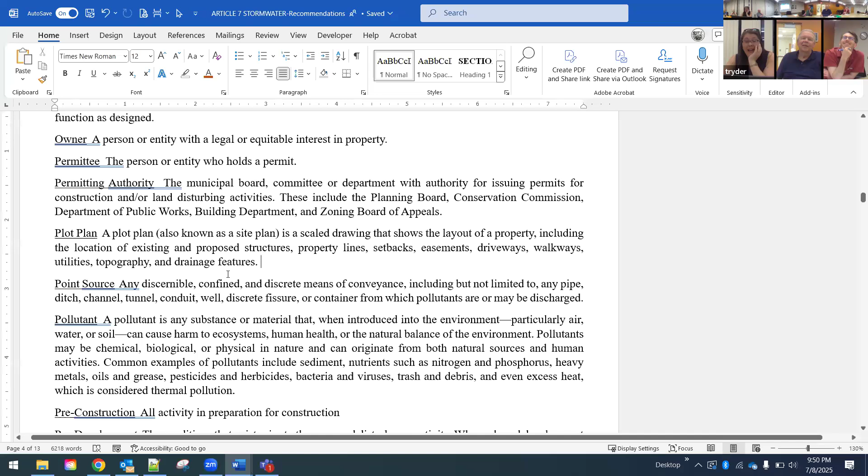I love Google. Actually, I love ChatGPT. But anyways, a pollutant, definition of what a pollutant is.

A pollutant is any substance or material that, when introduced into the environment, particularly air, water, or soil, can cause harm to ecosystems, human health, or the natural balance of the environment. Pollutants may be chemical, biological, or physical in nature and can originate from both natural sources and human activities. Common examples of pollutants include sediment, nutrients such as nitrogen and phosphorus, heavy metals, oils and grease, pesticides and herbicides, bacteria and viruses, trash and debris, and even excess heat, which is considered thermal pollution.

Excellent, what about light pollution? Well, yeah, but this isn't the essay of essays about pollutants, it's just a definition. I beg to differ, I agree, I hate light pollution. Do we want to include light pollution? Didn't Joe just do stuff about light? He's a light expert. You had to measure light? I think he's remaining silent. Light and even excess heat. Light and EMS, all right, good, okay, thank you.

Pre-development is the conditions that exist prior to the proposed disturbance activity. Where phased development or plan approval occurs, preliminary grading, roads and utilities, etc. The existing conditions at the time prior to the first plan submission shall establish pre-development conditions.

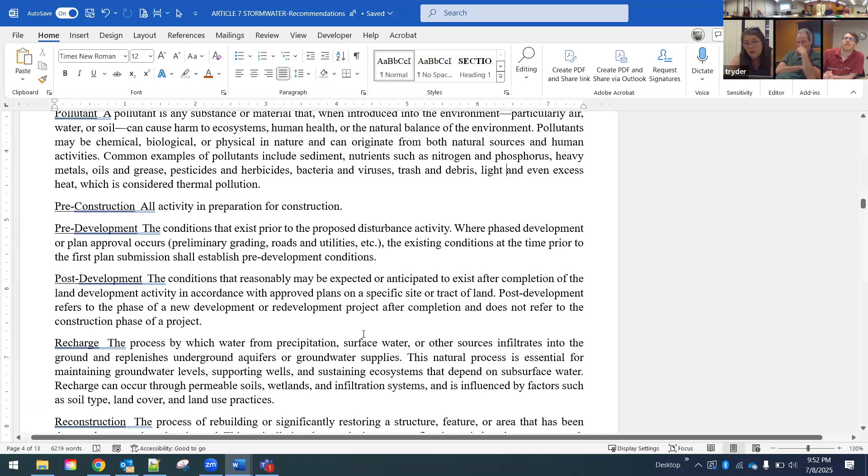Recharge means the process by which water from precipitation, surface water, or other sources infiltrates into the ground and replenishes underground aquifers or groundwater supplies. This natural process is essential... I'm thinking I can get rid of everything from there. It's nice to know, but...

But we're moving on, I have a Q, okay: qualified soil evaluator. Or would that be soil evaluator? Yeah, soil evaluation.

And reconstruction? The period after the Civil War, in which voting rights were extended, and it ended in the Hayes administration.

Qualified soil evaluator, and I think that's Andrew, right? Andrew, yeah, thank you. All right, you know what we should do our last meeting, we should play Trivial Pursuit at the end, wouldn't that be fun?

It has to be stormwater, all of our random knowledge, it's gotta be stormwater related. I always pick green, sorry, Trivial Pursuit is easier if you know all the answers. How about a board game? That limits it just to soil evaluation. Stormwater board game? Yeah. Well we have stormwater coloring books. What is it? What are we storming on now? Drain, Wayne the storm drain.

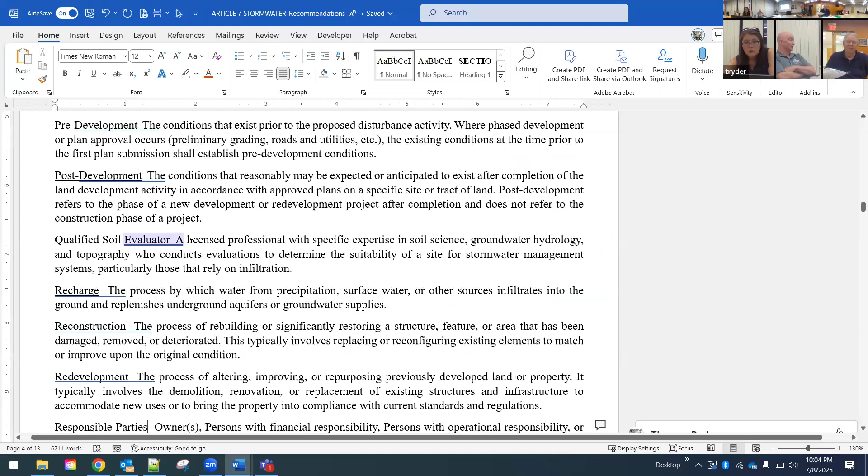This has actually been a long history of an issue since 1994 at least, of who can conduct soil evaluations for septic systems. You had soil scientists teaching the class, but they could never become a soil evaluator because they weren't engineers. So.

Oh boy, I'd like to. And hold on, the reason why the state had trouble with it was because a lot of people would call themselves soil scientists without a real degree. Okay, well, I'm a soil scientist. Right, but I have a lab. You just made up initials after your name.

But then there were people like Peter Fletcher, who worked for the USDA, Soil Conservation Services - brilliant guy - and he taught the class. Yeah, sometimes we trip over our regulations, but he'll never become a soil evaluator despite what he was teaching.

Well, there are so many categories for engineering now, it's just wow. Yeah, now you've got all these wind turbine specialists and... all right.

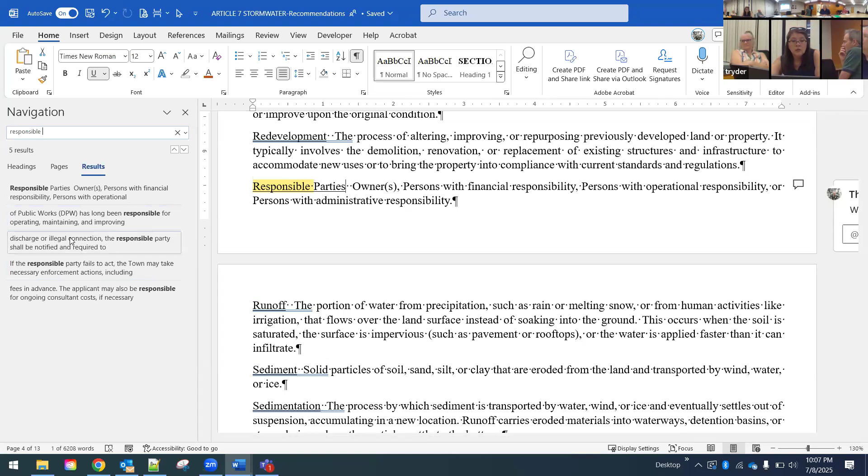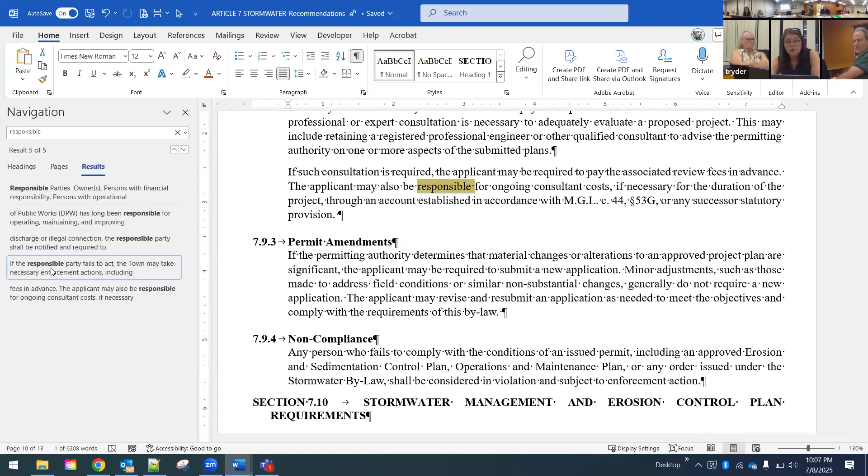Kim checked it all. Well, I'm a little - there we go. I am a little - isn't it just in context? If the responsible party fails to act, the town may take necessary enforcement action, including but not limited to. The applicant may also be responsible - no, that's just responsible, so that was in one place. Responsible parties is, if the responsible party, it's the applicant, or permittee?

Yeah, instead of responsible party, we just say applicant or permittee? I think we should just take the definition out. Yeah, it's inconsequential. Okay, because it may, in that case, it may not be an applicant - it could be the owner or someone who didn't apply.

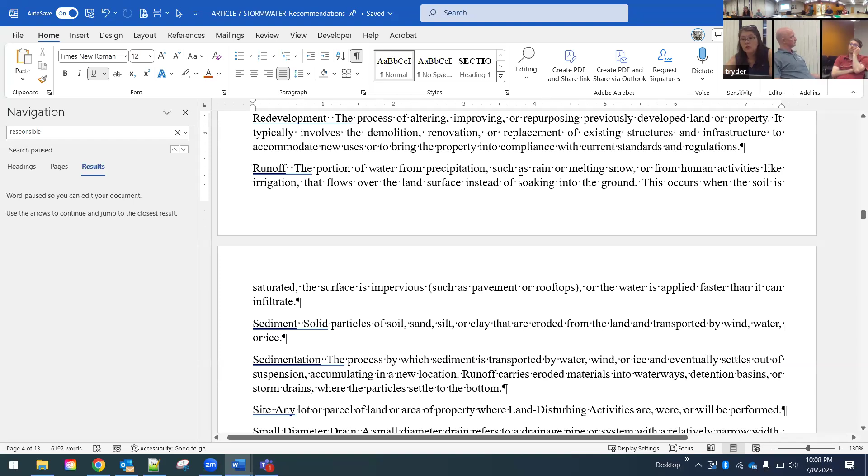Runoff: the portion of water from precipitation, such as rain or melting snow, or from human activities like irrigation, that flows over the land surface instead of soaking into the ground. This occurs when the soil is saturated and the surface is impervious, such as pavement or rooftops, or the water is applied faster than it can infiltrate.

Sediment is solid particles of soil, sand, silt, or clay that are eroded from the land and transported by wind, water, or ice. Standard.

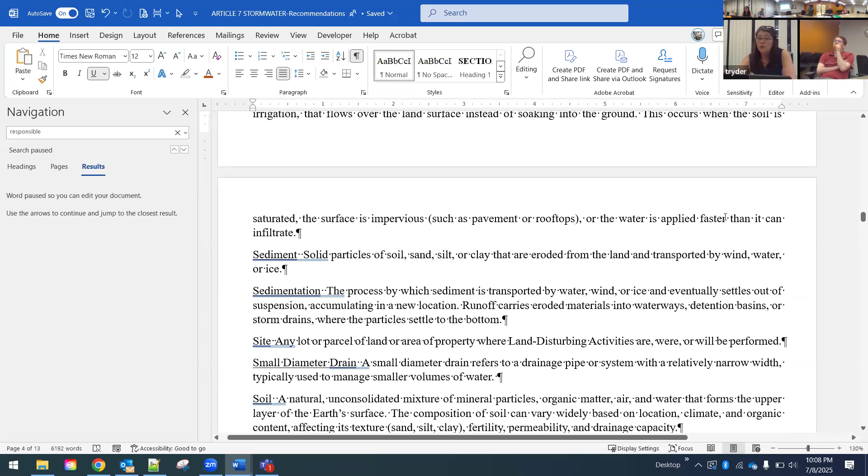Sedimentation: the process by which sediment is transported by water, wind, or ice and eventually settles out of suspension, accumulating in a new location. Runoff carries eroded materials into waterways, detention basins, or storm drains, where the particles settle to the bottom. A site is any lot or parcel of land or area of property where land disturbing activities were, or will be, performed.

A small diameter drain - I don't know that we talk about small diameter drains here. I think we're saving them for the regulations. I think it's important to have some sort of reference in the bylaw for small - I know it's kind of late right now, but.

We need to put the small diameter drain requirements into our regulations - there's a place to put it, we just need to reference it somewhere in the bylaw since it's not there right now. Should I take out the definition for now? I think it should go in the regulations, we could give the authority for definitions there.

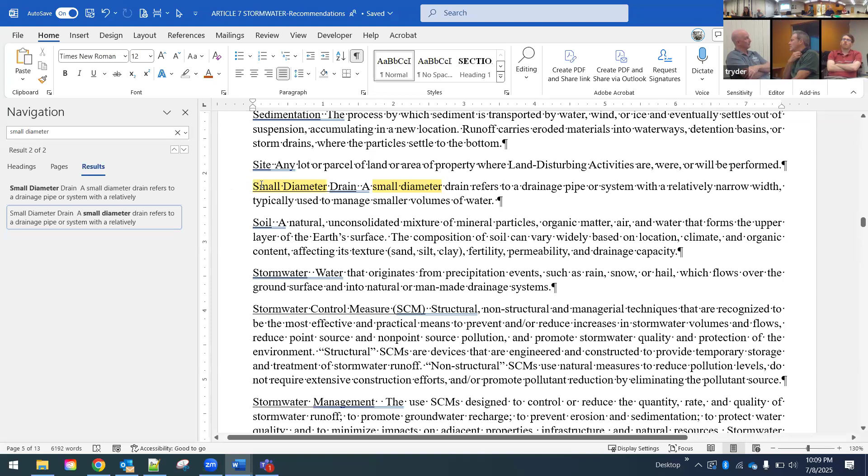All right, hold on, these are all my regulation notes. Let me paste this in... got it, okay.

Soil: a natural, unconsolidated mixture of mineral particles, organic matter, air and water that forms the upper layer of the earth's surface. The composition of soil can vary widely based on location, climate, and organic content, affecting its texture - sand, silt, clay - fertility, permeability, and drainage capacity.

Stormwater: water that originates from precipitation events such as rain, snow, or hail, which flows over the ground surface and into natural or man-made drainage systems. Before there's stormwater regulations, so that can go... oh, you have two spaces in stormwater.

Stormwater is okay, water that originates - yeah. What am I doing again? Stormwater regulations - no, sorry, I read it the same way. It should be after stormwater then.

I'm not in the S's yet. Can't be that much more, right? Come on, have a heart.

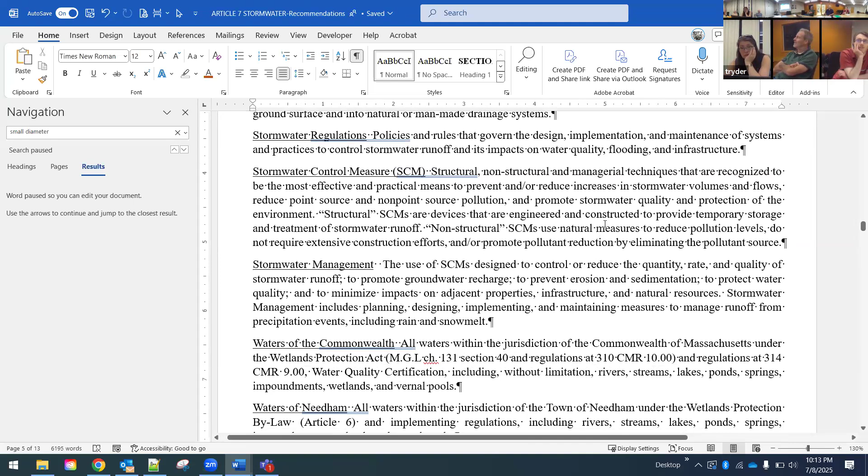Waters of the Commonwealth - again, another alphabetical thing. Stormwater regulations should go after stormwater management.

Why are you going up? Because I'm tired. Well, go up then. Stormwater regulations go just before. I see the end, come on guys, it's in sight.

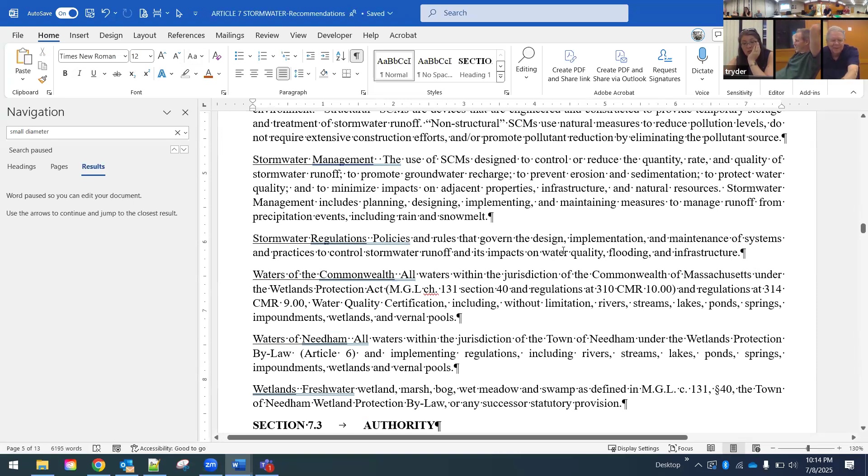We can do it, we can do it. Waters of Needham - Waters of the Commonwealth is defined by the state of Massachusetts. Waters of Needham was previous on our last one: all waters within jurisdiction of the Town of Needham under the Wetlands Protection Bylaw, which is Article 6.

Wetland is defined as freshwater wetland, marsh, bog, wet meadow, and swamp as defined in Mass General Law Chapter 131, Section 40, the Town of Needham Wetland Protection Bylaw, or any successor statutory provision. Should we say wetland protection bylaw or regulations?

It's okay, we don't need to - if conservation agrees, we're set on wetlands. I know, I don't mean to rush you.